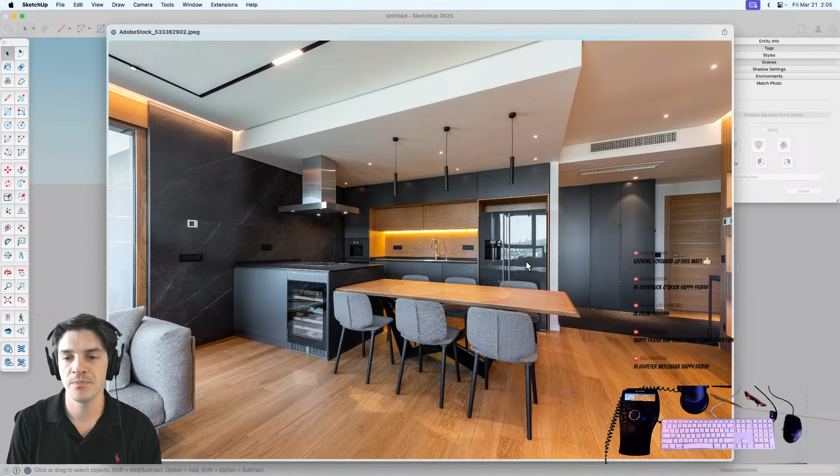But then to counteract the barrel distortion, they took it into some kind of photo editing app and made all the straight lines look straight. But those type of post editing techniques are usually not ideal for match photo, so we'll see if we run into any issues with that.

So you're saying it's all a lie? This space is a lie? Probably, that's what it sounds like. Yeah, I wonder what this would actually feel like if you walked into it. But I mean, I think it looks nice with the straight lines. It's just match photo doesn't work in great ways with that.

So anyways, yeah, let's get to going.

I want to select the photo, make sure that all supported image types are selected. When you import stuff, this is very important when you import an image, is whether you want to bring it in as an image, which is a special type of SketchUp group, a texture, which is a material that you can paint onto surfaces, or as a matched photo. This stream is about matched photos, so that's what we're doing for this one.

All right, bring it up. And here we are. There's a lot. This is, the first time I started up match photo, I was like, okay, this is too much, I don't know what's going on. I'm used to SketchUp being just faces and edges, really simple and easy to understand. There's all kinds of stuff, I feel like I'm in 2001 Space Odyssey, something crazy is going on, but it's not that intimidating. I'm here to tell you if you've never used this before.

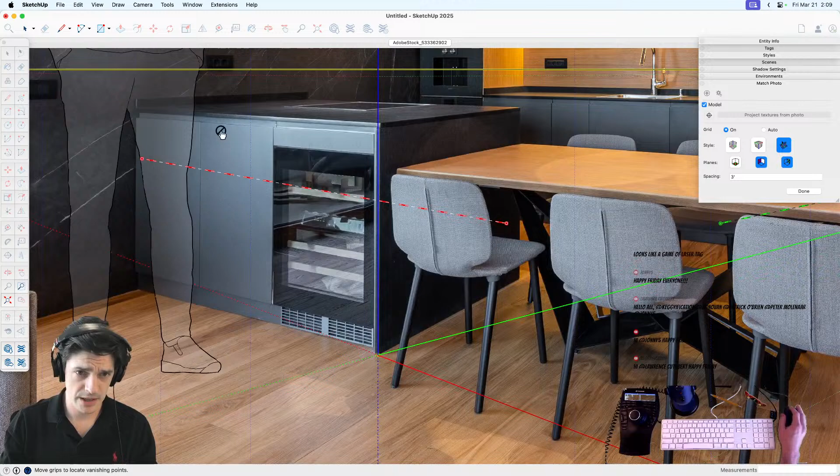The first one that I'll do is the origin. So this is literally the axis origin. When you start up a new model, this is what this is moving around. Typically you'd want to put this at where the ground meets, for an exterior, that main edge that's coming towards you, where the axes converge. In an interior, the corresponding edge to that would be kind of this one right here, where these two big planes of the main walls converge, but I can't really see where the floor is down here. So I guess I could try to guess and put it in, but in this case, I'm just gonna stick it right on this little countertop because this kind of comes out just like a building would.

So I'm just gonna drop this right in this corner. And one thing when you're doing match photos, it's all from the same perspective, right? So you can zoom in and pan around and that doesn't affect anything. But as soon as you orbit, then you lose that. So whenever you make a match photo, it will put you into a scene with the styles, so it's like a special kind of scene that has this match photo and these overlays and stuff. You can zoom in all you want and pan all you want, you just can't orbit or else it'll move you away from that perspective. So one thing to keep in mind when you're using match photos, certainly.

Okay, so I'm going to try to drop this right on that little spot. And yeah, it's not exactly perfect, but I guess the further you zoom in, the further it's like, oh, it's 2 pixels off. I think it'll probably be fine. Yeah, Studio RT Cool said, litmus test is this: if the vertical lines are vertical and the horizontal line isn't dead middle, then it's been corrected.

Yes, that's a good rubric, certainly.

Ricardo asks if it's possible to use the tool to fit an already modeled object to the photo as well. It is, yeah. I'm not going to do that now, but basically you'd orbit to around the same view and angle as the picture, go through this whole process, then scale it, move it around, and put the model into the correct perspective of the picture pretty easily.

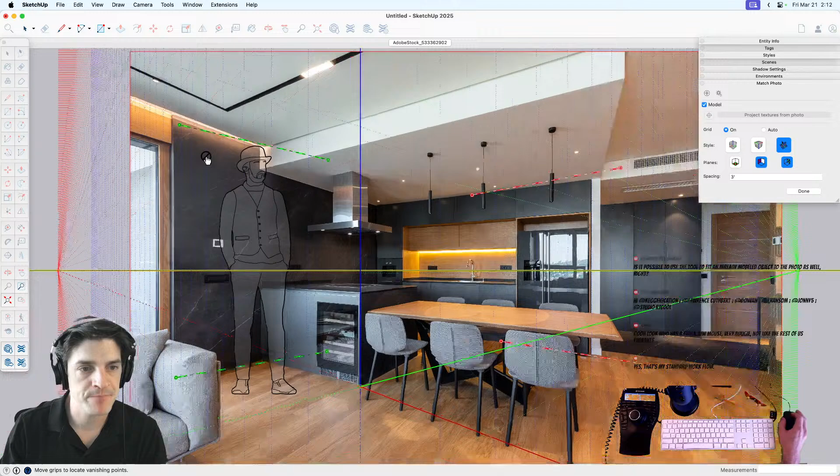Now I have to find lines that are parallel for each axis. One thing I noticed when testing this before is that small adjustments make a big difference. I haven't proven this, but I think the farther apart the parallel lines are, the more leeway you have on how exact you need to be - the difference between them gives you more accuracy. That's my hypothesis, but I haven't taken it into the lab yet.

Peter says choosing the necessary vanishing point is the trick to making a good drawing. Yeah, I could use this one up here, but it's a bit higher, so I'll try using that one instead for the green side - the very top of this marble wall, I suppose, it's what it looks like to me. You can try to put this right on the end like this, but you don't have to, it's really just all about the line. I'll pull it a little bit longer so I can get a better look at whether that's lining up or not. It's pretty close right there.

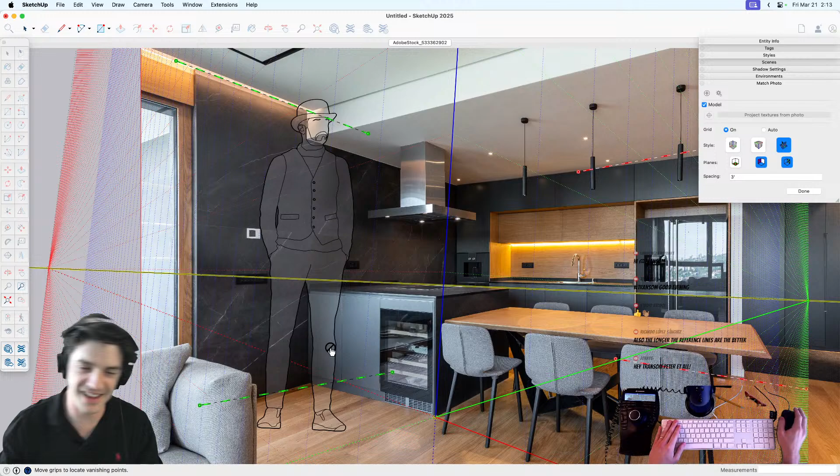Sorry, I have my microphone - I have so many things set up, and my microphone is right center of my screen, but it's blocking the bottom middle. So I have to move my head around, or I guess I could just pan around to the top of the screen. You learn something new every day. Oh yeah, so let's see.

I guess I'll just use the straight up floor, that should be okay I feel like, because it's on the same plane as this - and it doesn't even have to be on the same plane as long as it's on the same vanishing point, right, as long as it's parallel. So I could technically use these floorboards or something to line that up. But green looks pretty good. Let's try to do this upper part.

Studio RT Cool says you can drag the line around and check it with multiple references. With multiple references? What is it - oh, meaning I could go like this. Oh okay, yeah that's cool, good call. Yeah, because it kind of looks like it's lined up over here, but when I do it on this one, it's not. So that is a great tip.

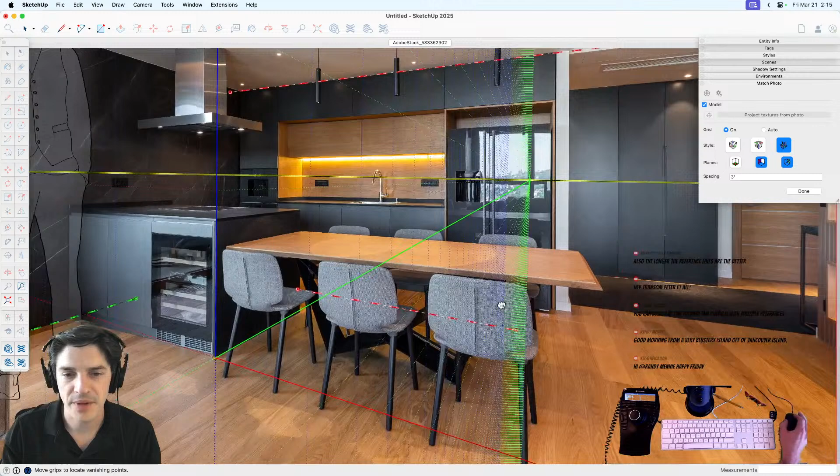Let's see, so I just need again this parallel - this bottom of this wall is not really visible, I mean it kind of is, but well, let's see what's going on here. I got the beach ball - are you still with me? Yeah, okay, yeah, I'm still here.

Okay, that's good. John is asking, can you add extra lines? Not that I know of, although you could do the same thing Studio RT Cool said, where you just drag it around, and if it's at the right perspective, it should match on all of them. I think really all you need is two, and then the relation between them.

Okay, party on. Let's see if this is not responding. Love to see it. All right, well, we get a crash course in doing it again real quick.

Yeah, one thing that's also cool about match photos - you can do multiple different photos in one model. If you have them at different angles of an exterior building, for instance, you can take them from every 45 degrees.

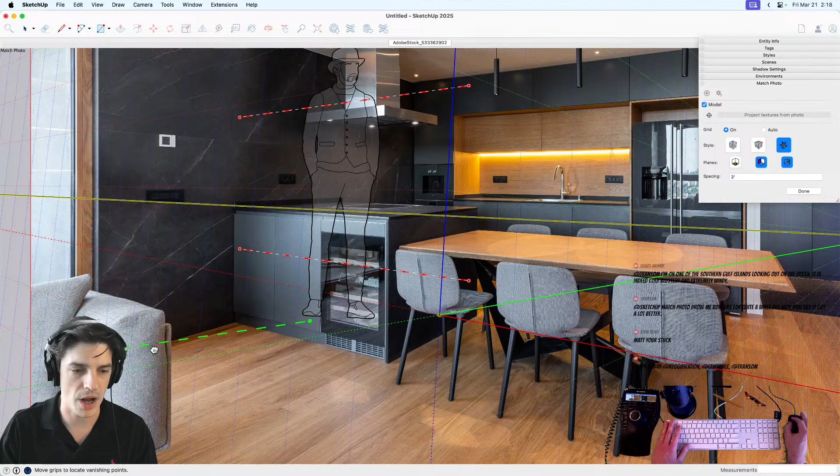Transom says Match Photo drove him bonkers for quite a while, but with practice it got a lot better. There's one thing in particular that I didn't understand about how it worked, and I was always running into problems with it. I'll try to show that in a second. Maybe it's the same thing, Transom, that you ran into.

So as I was saying before I was so rudely interrupted by SketchUp quitting unexpectedly, this edge is kind of hard to see. So I think I'm just going to use this straight up table edge, because it's parallel to the other red line and right in front of me and easy to see.

So I'll just try to go right down the center of this little line here. And then, oh, I forgot to move this guy, didn't I? Yep, get the origin right on the corner here.

One thing also is the scale. You can see TomTom is in here and he's kind of at the right scale. If you drag on any one of the axes, it'll scale, so you can see him get bigger and smaller.

By default, I think the spacing is set to 3 feet maybe, so there's this grid in between here, right? In between all the axes, it's just a grid, and that can be used to roughly set scale for this.

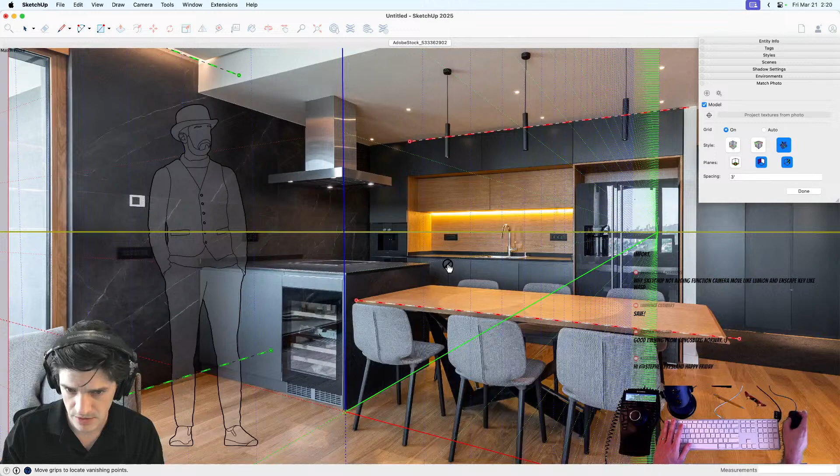And then yeah, again, I guess we could try to check these and make sure that they're all parallel, which, hey, I say looks pretty good. So I'm gonna say done.

And now we have our scene set up with our scale appropriate in there and the perspective is correct. And I'm going to save my progress.

Yeah, probably need to do that quite a few times. Just to be safe. Be careful. Yeah.

I had been having the same kind of troubles that Aaron had last week with internet connectivity problems. So that's the bad news, I guess. The good news is that I think I sorted it out. So software stuff aside, hopefully we don't lose any connectivity here, but I hate to say it has been happening to me this week. So we shall see, but hey, knock on wood that it doesn't.

Okay, so we are in here. This is the key thing that I always got wrong with Match Photo. I would do the perspective lines and everything and be like, all right, great, let's start sketching this out. You know what I mean? Or maybe I'd go from here to here, and then I'd push this back, and then I'd be like, all right, get that good. And then I'd orbit to check it out.

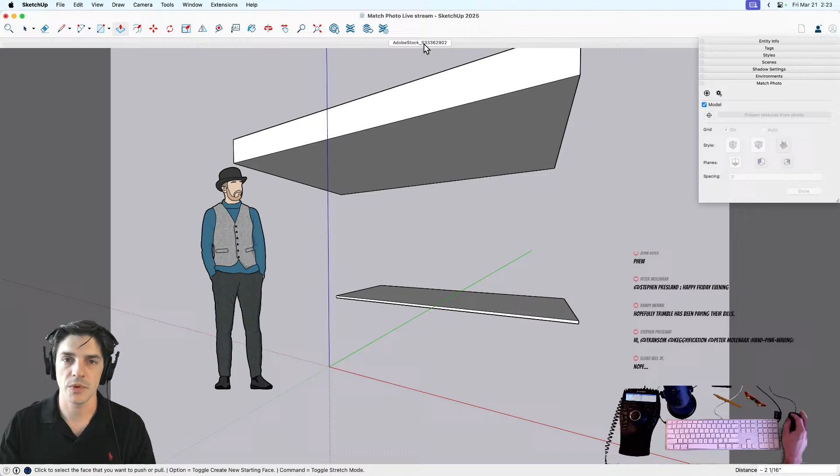But the thing is, you want to start modeling from the origin, because the origin is where all the perspective comes from. So as long as you start from the origin and then reference or inference from geometry based off the original stuff that you drew from the origin, then everything will be properly aligned and in the right spot.

So that's one thing that I tried to use with Match Photo, and then I was like, okay, this is a nightmare, I can't get anything right. I'm always spending 10 minutes tracing it and then orbiting around and looking at it and everything's wrong.

Elijah says you should line your corner to a corner.

Line your corner to a corner. The origin, you mean? You didn't specify. Perhaps. Well, let's see if I start drawing. And again, oops. Oh boy.

Here's one more thing when you're doing match photo: it's set up in a scene, right? So when you click back, just to save the extra 2 seconds every time I go into it, I'm going to turn off scene transitions under animation in model info. That way, if I go back to it, I snap right back, and I don't have to wait 2 seconds for the camera to animate.

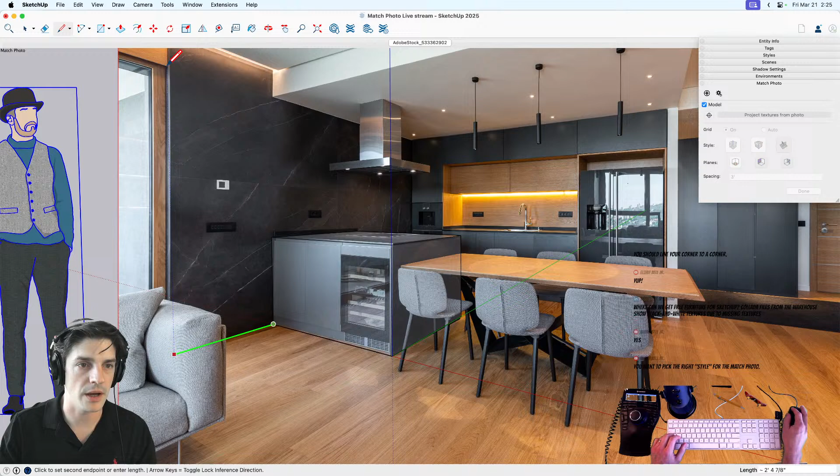First, start drawing in the green, and the nice thing about this is I can inference to the picture itself. So there's more distortion at the corners. You can see it doesn't exactly line up straight, but I'm just going to try to bring it to, I don't know, halfway up, splitting the difference. And then to here. And then I can come, let's see.

Got a question from LinkedIn. Where can we get free furniture for SketchUp? A lot of files from the warehouse show black and white textures due to missing textures. Oh, interesting. Like models that have V-Ray textures applied, or textures from another rendering software. Is that what they're saying?

Not sure. Maybe. Because any materials that were in the model when it was uploaded should still be there, and not be black and white. I've never seen a black and white type thing before, but I have seen missing textures in a model once it's uploaded to warehouse, like my own, that Aaron actually did a tutorial on how to fix, because when I applied them in the model I didn't do it quite right, so they didn't work. Oh, like for AR viewing. Yeah, for AR viewing. So you go into AR, and there's just a bunch of blank spaces in the model where texture should be. Yeah, maybe that's what they're talking about. I would check out our YouTube channel for that video in particular to see how you can make your model look as it should when you're doing AR viewing off 3D Warehouse.

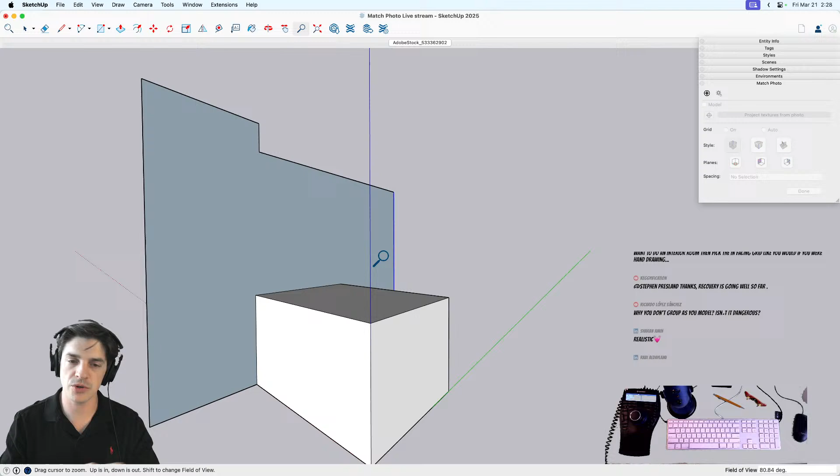So let me just orbit out here real quick and see how things are looking. One thing you'll notice is that there's a lot of distortion going on because the SketchUp camera matched as close as it could the perspective of the photograph. When I hit Z, you can see my field of view is 80 degrees, which usually you wouldn't model in because there's so much distortion. But like I said, for real estate and stuff, they'll shoot that to make spaces seem bigger and more fancy than they actually are.

So Ricardo says, why do you group your model? Isn't it dangerous? Why don't you group as you model? Isn't it dangerous? Yes.

So this is kind of a specific workflow because you're tracing over stuff, right? I could group this as a wall right now, group this as a wall, but because I'm just tracing, it's helpful to have stuff that I can interact with. Like if I wanted to draw a rectangle over this and push this back, I'd have to go into the group and do that - not that annoying, but just one extra step versus at this point just tracing everything out. That's what I'm doing, getting the rough shapes in there, and then I'll go back in and group things in a way that they don't interact or do anything we don't want later. But now I'm just trying to roughly put in and block in the basic shapes and geometry of the space.

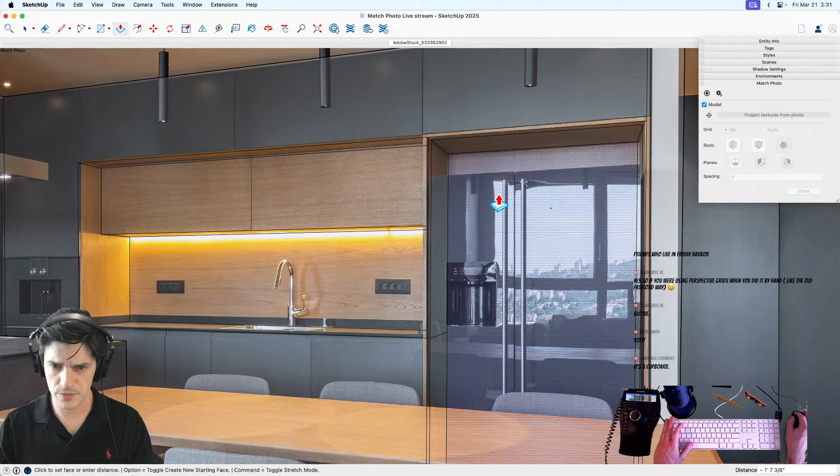How deep is a fridge? More than 1'7", isn't it? Typically, yeah. Maybe it's a European fridge. So maybe the fridge is typically 30 to 36 inches deep, depending on the style of the fridge. Cool.

Lauren says it's a cupboard. All right, could just be the camera distortion that's making it look weird to my eye.

But Ricardo says, I guess you're not grouping to surprise us later with all the projection of textures on the image - wink, wink. Yeah, that's one thing that's cool about Match Photo, is the projection of textures too.

So I can show you what that looks like. I guess I can just show you right now. So when you have - let's see if it works on groups, I don't think it works on group geometry, but we can try. I have my scene here, my photo match, and my geometry is on here. And then I'm going to right click and say project photo. And then what this does is asks well, one of these, so I'll just say no for now and show you what this does.

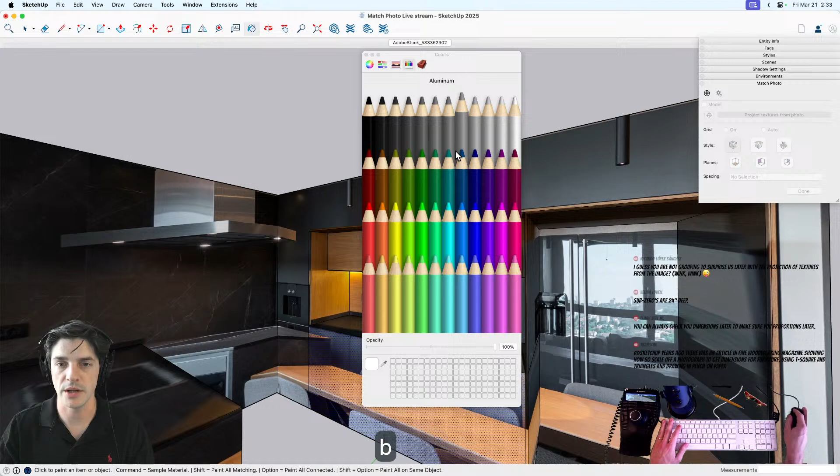So now from my particular angle, this geometry appears as though everything's in the right place, right? But since it's projected, it doesn't exactly do what you want it to do. But this is actually pretty nice. I can look at it at a couple different angles, and the back wall looks pretty right. I could come in here and change this to be a different material or whatever it is, if that's what I was going for.

There's always going to be a little bit of distortion because you're taking the photo at an angle to do the match photo. So maybe a quick and dirty way - or if you're doing context buildings, this is an easy way to get them looking like the real building looks without modeling in all the detail.

But for this particular case, actually I should say, oh boy, it's already 34 minutes in. Time flies when we're having fun, right? I guess so, right.

What I was going to say is my goal for this stream is to model out the majority of the shapes in here and then kind of apply materials to try to replicate the look of this interior space. And I feel like there's always that one point when I do live streams where I'm like, okay, I need to actually buckle down and try hard now, or get going.

Elijah says you can always check your dimensions later to make sure your proportions are right. Transom said years ago there was an article in Fine Woodworking magazine showing how to scale up a photograph to get dimensions for furniture using T-square and triangles and drawing in pencil and paper. Interesting, now we're just using technology. The old-fashioned way sounds more fun than...

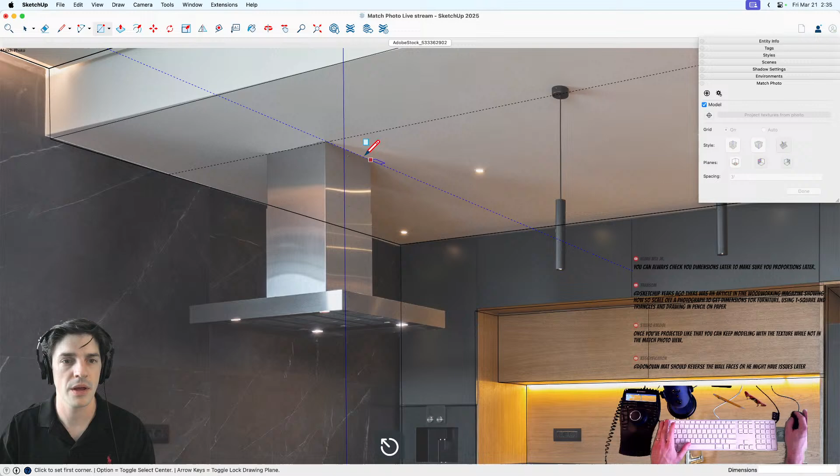Keggy says Matt should reverse the wall faces or he might have issues later. Yeah, that's a good point. I will do that as soon as I'm done roughing in this stuff.

Studio RT Cool says once you've projected like that, you can keep modeling the textures while not in match photo view. Keep modeling with textures.

Oh, meaning like... I don't know, all this is beyond my area of expertise. Not that I have an area of expertise, but this is definitely beyond any area of expertise that I have. Yeah, me too. Let's see.

Is this maybe not, might not be a square? If I'm just tracing over this in 3D.

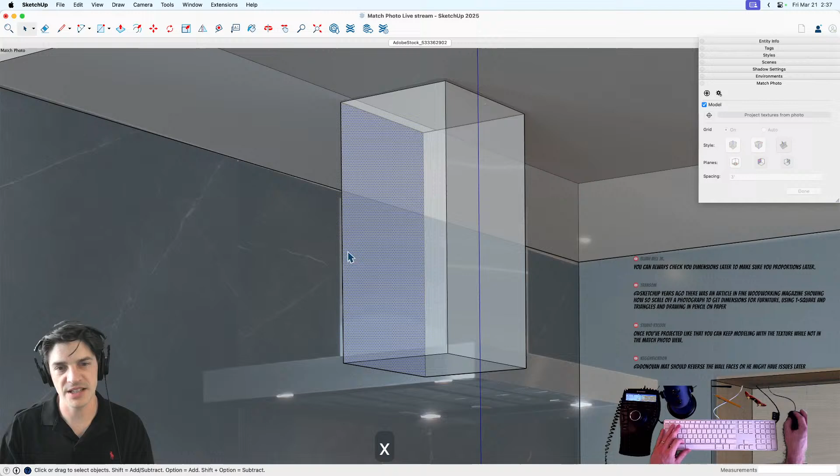One thing that's nice about match photo is, okay, when I'm looking at this from this angle, this looks like it comes out maybe a little bit further, or steps out or something. But I can't grab that face, even in X-ray I can't really get to that face. But if I orbit out, go over to that face and start the action, whether it's push, pull, or move, and then go back to my scene without orbiting, I can move that face into the exact right spot as long as I don't orbit again.

Oh boy, to get that lined up a little bit nicer.

But what are you gonna do? Okay, this one's really... we're here to find out, right? Sorry, what'd you say? I said that's what we're here to find out. Yeah, oh yeah.

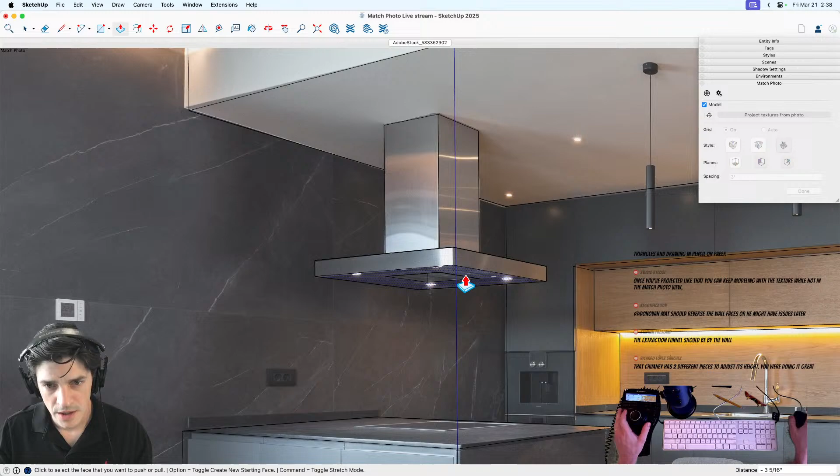Okay, push. Nope. Go back to our scene. Okay, so that looks like it's on there. Oh boy, pretty good. Let's maybe do this table section. Or, I didn't do the floor yet either. I guess for the floor, I can just go like this.

Elijah says it looks like the top of the hood is tapered down a bit. And Ricardo says the chimney has two different pieces to adjust its height.

You were doing it great. Yeah, maybe I should. Oops. I'm trying to use this 3D mouse, but it's one of those muscle memory things where I'm not really used to it yet. Okay.

So if I move that vertically and then switch back to this, it was like hands off the 3D mouse when you're in match photo view. And then these maybe just go in like 0.5 or something.

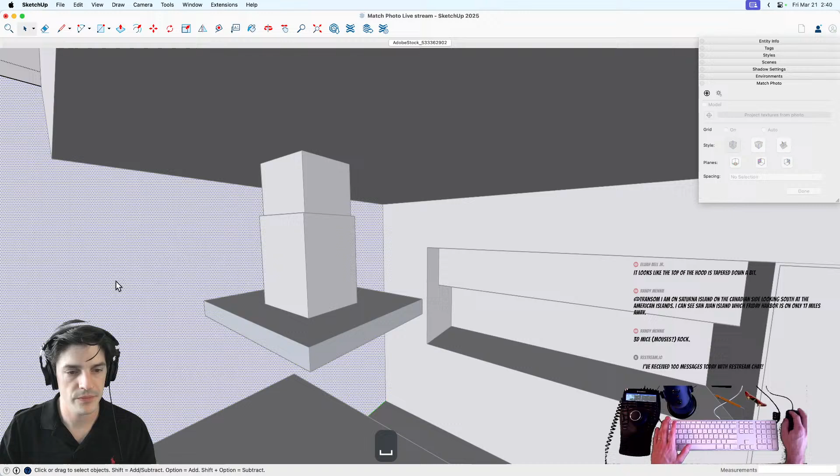All right, okay, let's see about these reversed faces. Reverse, reverse. Ooh. Okay.

And he says 3D mouse rocks. Yay, yeah, I've definitely felt like I've been rocking with it so far. Feels like I'm flying. That's what I told Aaron the first couple of times I used it, I was like, it feels like I'm flying. Because when you're so used to only being able to move in or orbit separately, to do them at the same time just kind of frees you up so much. It's a good feeling.

Okay, so that's kind of the roof part, and then this to here.

Yeah, as it gets more close to the side, you lose the... maybe that's just further back.

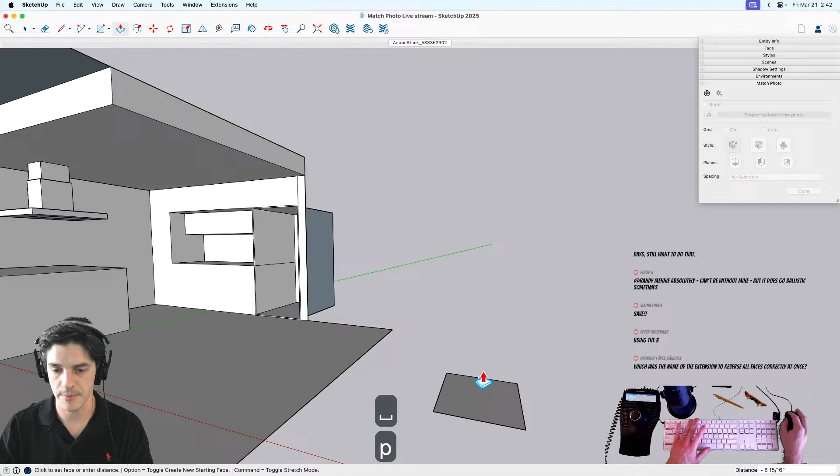Ricardo asks what is the name of the extension to reverse all faces correctly at once, if there is one. I don't know it, but Orient Faces does that without an extension in SketchUp. So if I have, let me just get something over here, and if I have these reversed... so don't mind the weird camera angle, but you can see there's all these kind of reversed faces here. As long as they're all connected, you can right click on one of the faces that's oriented the right way, and then say orient faces, and that will make all the faces switch to match the orientation of that one. But if there is an extension that does that in a different way, I'd be interested to hear about it.

Studio RT Cool says native tools can orient faces, but it can be confusing.

Okay, so I do have another picture of the same space. I got this picture to show us the detail on this table, which we might not even get to, but there's this kind of weird triangle thing going on underneath. I was trying to see how far back it went. Probably it just goes... I'm just going to say it goes the same distance back as this on that side.

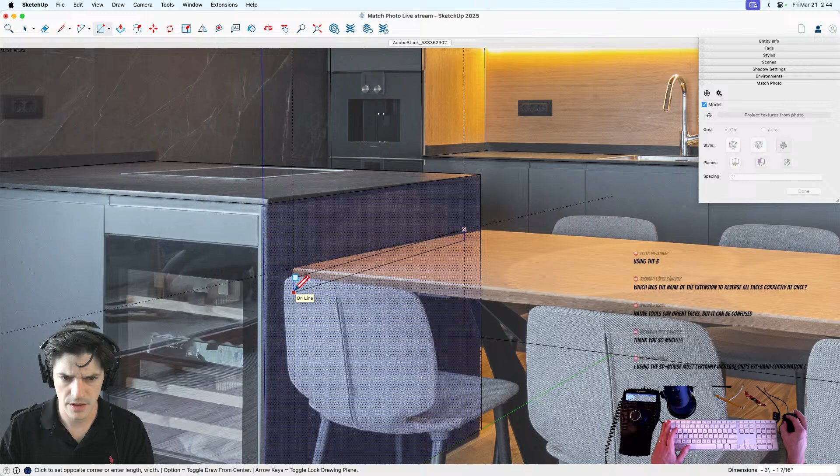Make sure you know which direction you're pulling guides from. Green, 4 inches, rectangle, down this way. And then we'll do a proverbial push-pull.

Don't orbit. Maybe that's the bad thing about the 3D mouse, that you can orbit so easily and freely with it. Randy, or Peter says using a 3D mouse must certainly increase one's eye-hand coordination. Yeah, I feel like it does. It's definitely a different way of moving and thinking in 3D. Not that I'm a master or anything, but I feel a lot more free, even after a couple days of using it, you kind of get used to it a little bit.

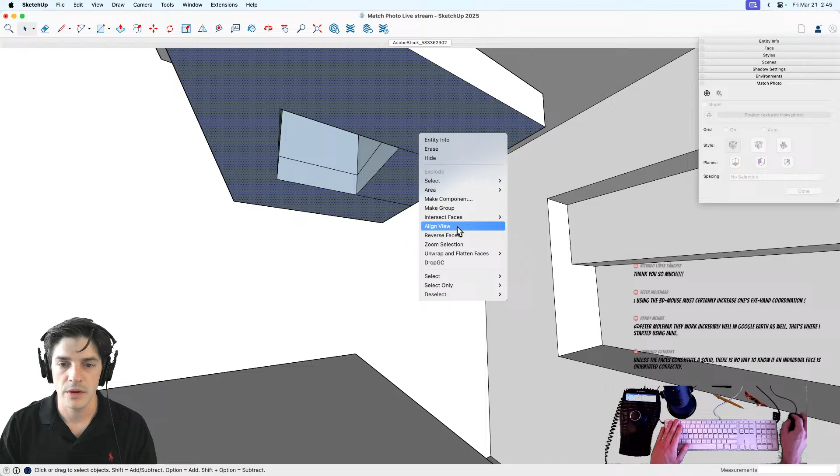And this is weird. Reverse these faces. I'm just going to close this up and say don't worry about what's going on under there. Pay no attention to the man behind the camera.

So I don't even know if I'm going to do this kind of mudroom hallway with this door and stuff, or maybe I should just focus on the kitchen itself. What do you think, chat? What are your thoughts, Donovan? Should I do this back hallway too? Yeah, depth, gotta go for depth, right? Depth in your model is good.

We don't know how far it looks. It looks like, I can't tell if this ends here or if it goes behind. I'm trying to orbit back there. If this hallway extends, or if it just ends here and these are there, either way it goes backwards a little bit. So if there was this here and this actually moves a little bit further, let's see.

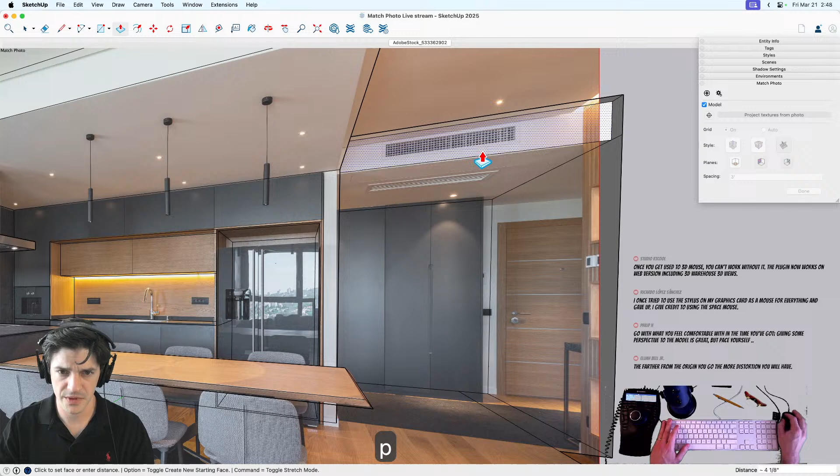Ricardo says I once tried to use a stylus on my graphics card as a mouse for everything and gave up. Give credit to using the space mouse. Philip responded, go with what you feel comfortable with in the time that you've got. Giving some perspective to the model is great, but pace yourself. I think that's in reference to the question you asked about whether or not you should do that. Elijah said the farther from the origin you go, the more distortion you're going to have, so keep that in mind.

Yeah, that is true. Towards the edge, stuff gets pretty funky in this photo. You can tell, I only felt like I pushed this a little bit, but it's all the way over there. Anyways, okay, this we can say.

Just doing this door frame, and then here we go. We got a door. All right, let's do these lights now.

So I think I'm going to do a little bit of a mixture of tracing the picture and also using guides and dimensions to make sure that they're actually accurately spaced. Oh, you said the G word. Hey, I've already stealthily used a couple guides already so far, but yeah, I'm not averse.

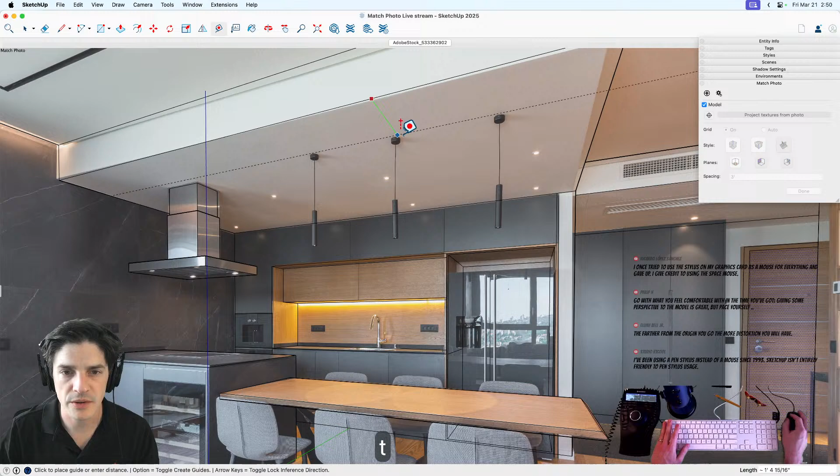Let's see, do we think they line up maybe with the middle of this thing? Or maybe they're not lined up with that at all. Maybe they're lined up with the middle of this table? What does it look like to you? I don't know, hard to tell. If we try to pull one to the middle, what does that look like? I would assume that they would be middle to the table.

Oh, look at that, you're right. Whoa, is that just luck? Yeah, that's almost exact, isn't it? Oh wait, I was looking at it at a weird angle, but yeah, never mind, it's pretty close. And it looks like maybe it might be lined up with the front of that. So maybe that's the idea, is it lined up with the side of that guy?

Okay, so maybe I will just do that. 3 feet, gotta be. Wait, what? Move. Oh, okay, I understand now. 2 feet, gotta be. All right, move this 2 feet this way.

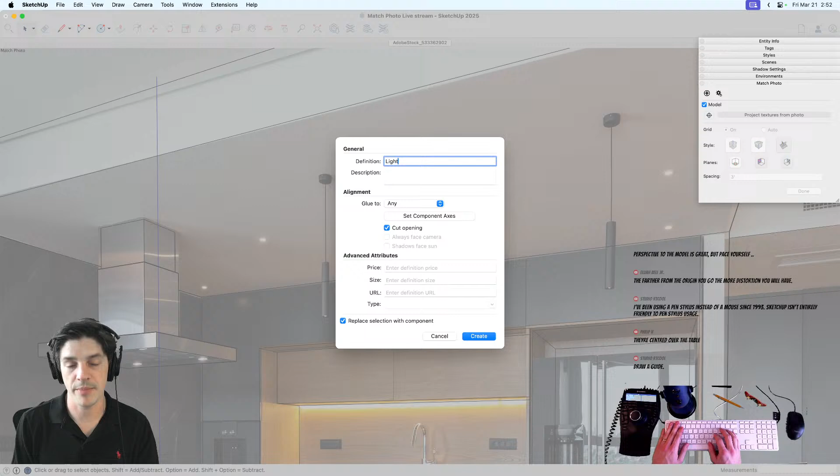Delete this. And yeah, it's not going to line up exactly, but I'm okay with that. Maybe I should make that into a component before I do that. That's using the old noodle. Make component, light, there's got to be a pendant light. Is that a light that comes straight down? Pendant light. One.

And then we'll move this guy 2 feet, and 2 feet. Yeah, maybe I should rough some other stuff in first before I'm already working on it. Let's do it. Okay, yeah, let's keep going.

Estimating, and then this is rounded a little bit. So what I'm going to do here is offset a little bit and then move this vertically just to kind of emulate that little round there. Offset again to get towards the middle, and I'm just going to pull this down. Looks like it kind of has a little curve to it, at least on the middle one, maybe that's due to the camera correction, but I don't know. Pull it down to here. Offset again, and down to here.

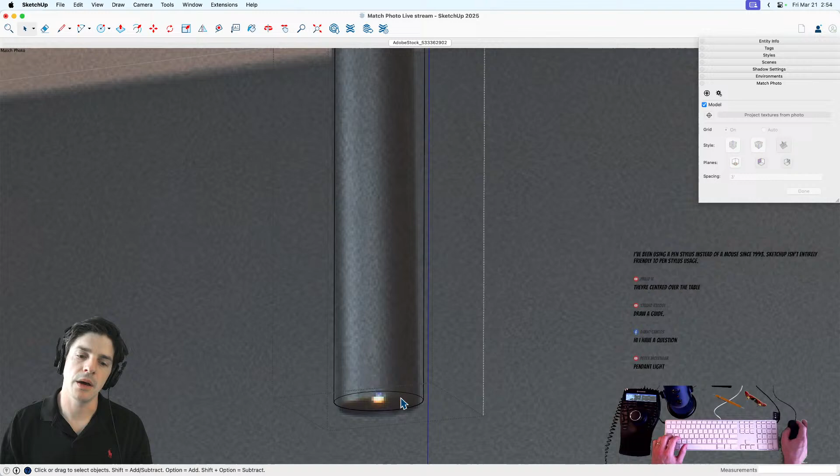Yeah, I can't tell. It looks like maybe it's offset, and then this is kind of pushed up like.

You know what, this camera view is kind of annoying me. So what I'm going to do is make a new scene and a new style as well, because that's where the match photo stuff is at in this one. I'll mess with that in a second to show you how it works. But for this scene, I'm going to change my field of view to something more normal, maybe 40 millimeters.

Not add, oops. Delete this and rename it normal perspective. Persp. Okay, and it did not save that. So, delete.

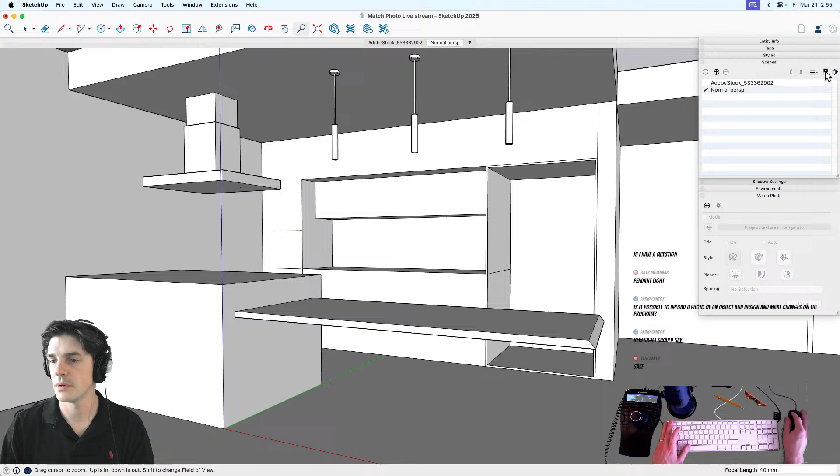Okay, cool. So when I'm back in this other scene, in styles with that photo in here, I can adjust how opaque the foreground and background are. So if I wanted to see more or less of what's going on back there, this has worked out okay. So I'll leave that as is.

Let's see what else we have. The bottom of the table, certainly. Obviously the materials—I'll probably go to 3D Warehouse for the sink stuff and the refrigerator too. There are those little locker kind of things over here, so I'll kind of work those out. Those go all the way up to the ceiling.

And then it's divided into thirds. Not lining up exactly, but what are you going to do? Like I said, unfortunately you're bound by the focal view of the image unless you have multiple images. Maybe someday we'll do modeling from a point cloud—go in, 3D scan a space, and then model from that. That's the real future.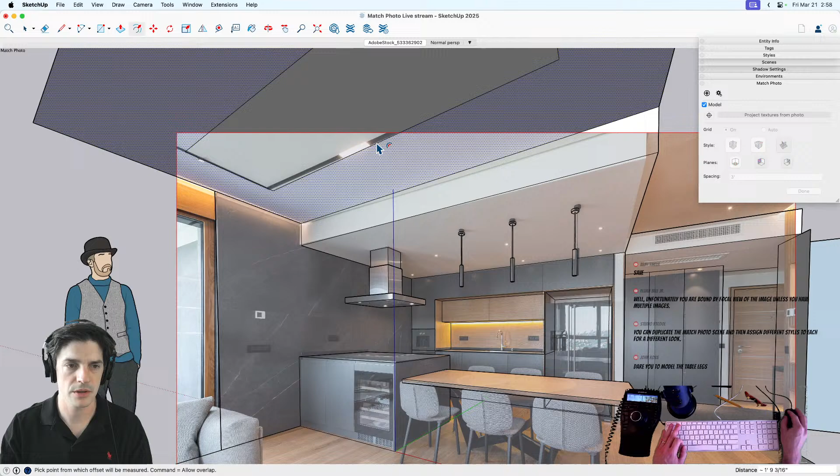Studio RT Cool says you can duplicate the match photo scene and then assign different styles to each different look. Meaning like have one of these with this off and then one with it on, but still be from the same angle. I'm guessing, yes. That's a good point.

Wait, oh, okay, add. And then this one will say foreground off, update, and then update. Oops.

Scene, transup says save, smart. Purge unused—I don't think I have any unused stuff. Oh, I guess I did have unused styles. Well, there you go, always good to purge unused.

Okay, and then I don't know what I'm doing, so I just delete the scene. And yes, okay.

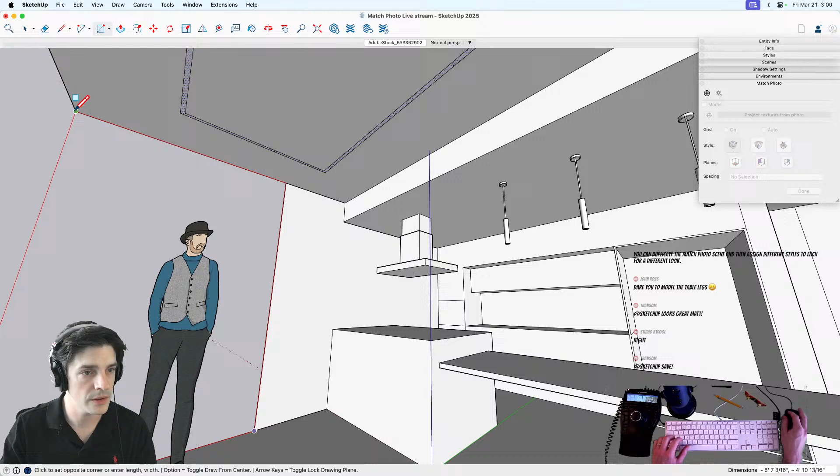Yeah, okay, so I was doing this here, offset to here, offset again. Okay, this window, I'll just draw this rectangle out here. And it looks like it goes back a little bit. And then there's the window. This one comes down further.

It's so cool how we can do this. Yeah, it does feel like cheating, you know? Like you shouldn't be able to trace like this, but okay.

Okay, yeah, let's see. There's these cabinets up here.

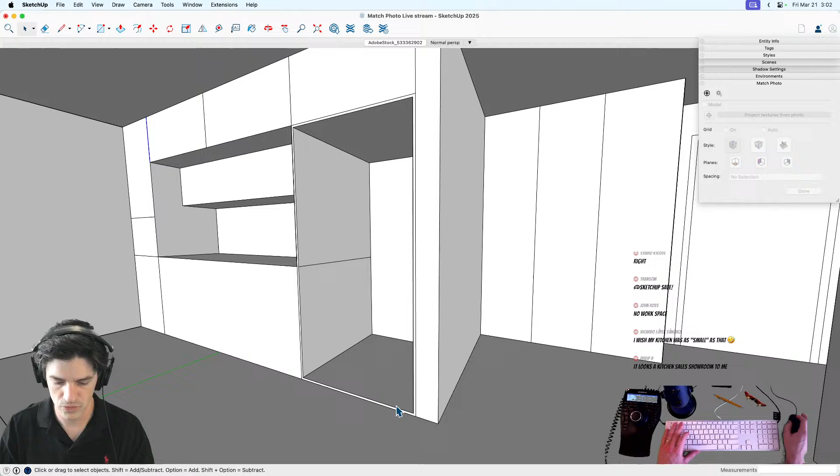By the way, this kitchen seems like kind of an interesting space to me—does anybody else feel like that? It looks like high quality materials, contemporary and stuff, but it's also small. Is it just because it's a European kitchen? Is it a kind of showroom type thing? Is this just a really nice apartment? That would be my guess, a showroom—there's such small prep space. It doesn't even seem like there's enough room to actually use the things, you know? Yeah, so maybe it's kind of just a space to show off what you could do, like IKEA showrooms. You go in there and think, wow, this is cool, but you wouldn't want to actually cook or live in here. John says workspace—yeah, could be like a co-working space with a kitchen. It definitely has that vibe of places our friend Aaron would go to, a communal space where you can rent an office but there's a kitchen, so it has that new contemporary look. At the same time, not being entirely practical if you were to live there.

I'm just kind of mocking in some. Ty says this kitchen has about double the space as my kitchen. I hear you.

It does have a really nice hood. I've always wanted one of those. You know, our house just has the little fan on the microwave, and it doesn't do anything.

Yeah, it's one of those like elevator close-door button, or a walk sign. It makes you feel like you're doing something when you push it a lot, but nothing's happening. Still, your house is going to get really smoky - or at least mine does.

Okay. What is going on over here? So this counter kind of just goes straight down and across.

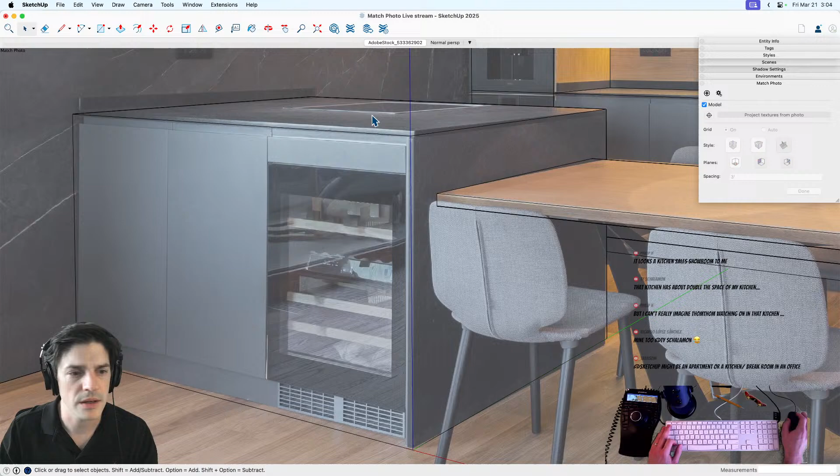I don't know, there's a lot of different things I could spend time on. Maybe I'll try to do this underneath-the-table thing real quick, and then spend the last 45 or so doing materials and grouping stuff, getting stuff off the warehouse.

Okay, so there's this triangle. If I could zoom in more. Okay, not that way - come back.

This triangle kind of, I don't know, cat-eye looking motif here, moves up in a couple spots. It looks like the whole thing is rotationally symmetrical, so I only have to do a quarter of it. And it just kind of angles down weirdly.

This is the kind of spatial understanding of stuff that I do not have whatsoever, and that Aaron is very good at.

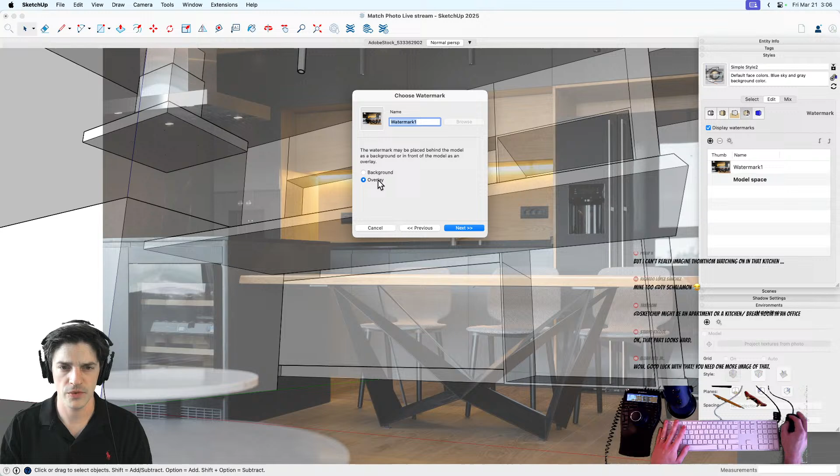So let's see, I'm going to add that photo in as a watermark, so I have just something to look at. It's going to be on overlay - it's very unique table legs.

It's probably way too big of a photo to bring in as a watermark, but what are you going to do? Like 15 megabytes, too large.

Okay, just temporarily I'm going to group all this stuff so it doesn't interact with what I'm doing down here. And I'm going to make a rectangle of this whole thing. Cut this into quarters.

Lars was saying, 'Good evening everyone, nice to see a new face.' Aaron was getting a bit boring.

Elijah says, 'Create points that are close to each touching surface, and then connect them with planes, maybe.' Okay, yeah, I can definitely try that.

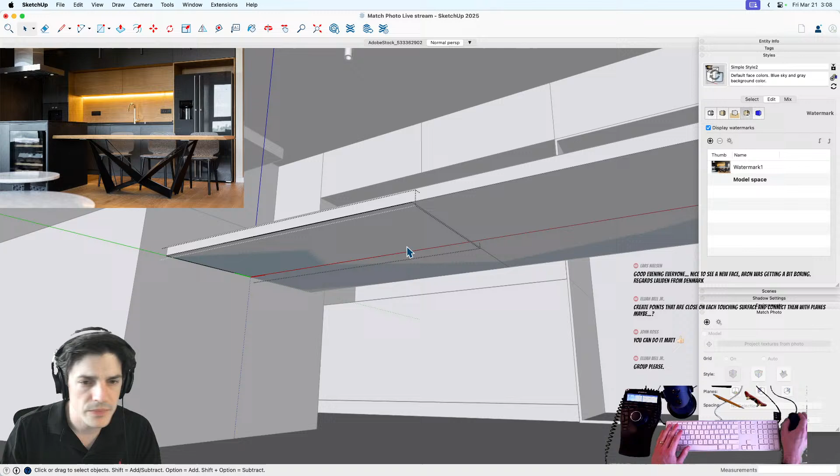Table legs quarter. Okay, and then we want to flip this, make a copy, flip these, make a copy. And then let's see - yeah, let's throw in some kind of planes here real quick so we know what we're doing.

Elijah says, 'Group, please.' Similar components. So kind of comes down from here, and then maybe this is actually a little bit further.

Up like this, and back. And then it's rotated.

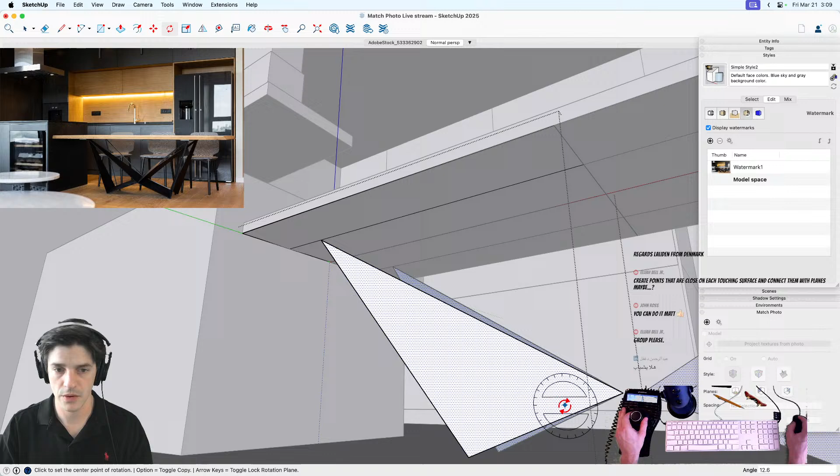But oh, now that I look at this, it's kind of flat, right? Well, I don't know, I like this being close enough, and then I can spend the rest of my time doing other stuff.

All right, in watermark I'm just going to go ahead and delete that one. Save so I can - I guess I don't have anything unused. Good.

Yes, yes, yes, yes, yes. Let's explode this. Let's start grouping stuff.

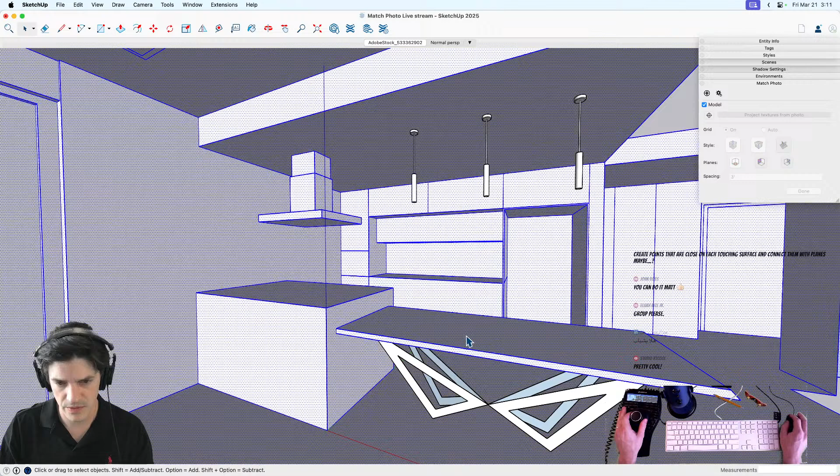These are already components. This is not - so these are components, and let's see, how am I going to only select this piece?

So I'm using the keyboard shortcuts you can see on there, just so I can try to just get this only, and then make sure I didn't select anything else, and fly around. I'm losing control of her.

Elijah just says that is not a cheap table. You are very right, yeah.

Select all instances and then make this a group. Okay, so now our table's a group.

This, without this piece - so I'm just trying to get the little peninsula here. Great.

And our hood as a group.

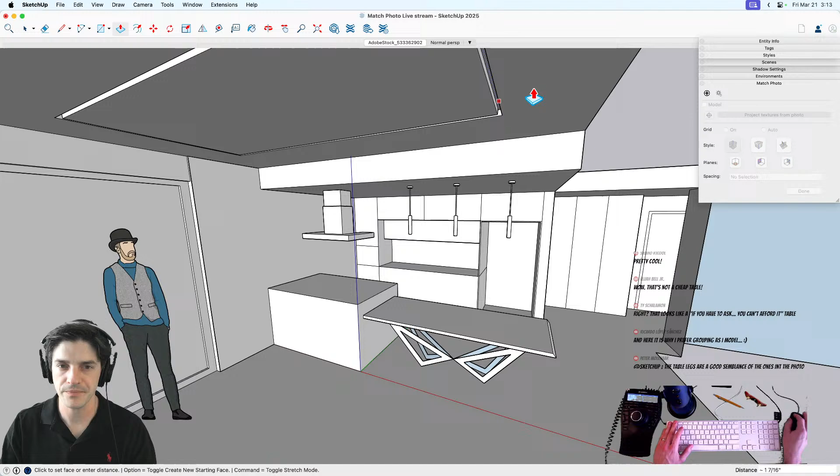And let's see if I want anything separate. All this other stuff could all be together. I'm going to push this up to make it a little more like it's that inset, whatever you want to call it.

That lighting, recessed lighting. Oh, maybe I'll make these little guys a separate group.

I guess they're attached to the wall, aren't they? So they are just part of the wall. That's fine. Okay.

Just so this stuff doesn't stick together, I'm going to make all this other stuff a group too. Is this the best model organization? Absolutely not. But I can't remember who mentioned earlier that you don't really want loose geometry. Thank you for saying that. So now we do not have any loose geometry, everything is accounted for, I believe.

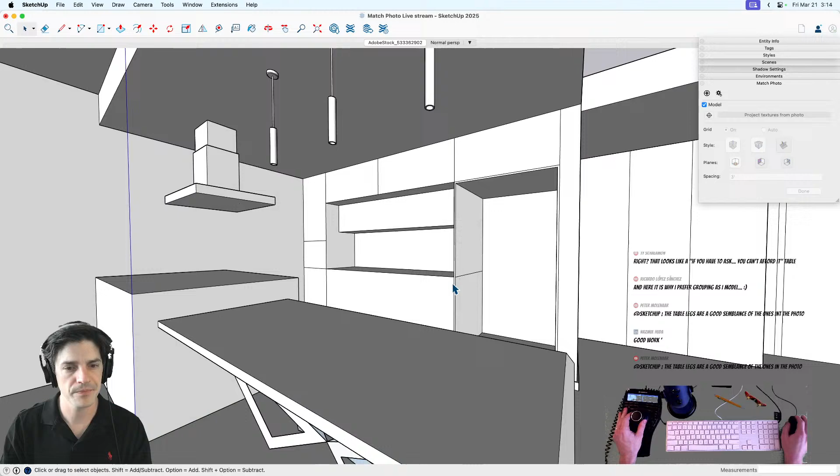Okay, let us... What do you think, folks? Should we do materials first, or should I populate this with stuff from 3D Warehouse? Like, should I get the refrigerator in, and the sink and the cooktop, or should I just start adding materials to try to line them up with the picture? What do you think?

In the meantime, I'll add some. Peter says the table legs are a good semblance of the ones in the photo. Carter says great job. I wouldn't make build plans off them, or sure, it's not called build plans, but shop drawings. I wouldn't make plans. That was okay, build plans. Yeah, plans.

These chairs I'll get on Warehouse too. Let's see, this is kind of split into thirds.

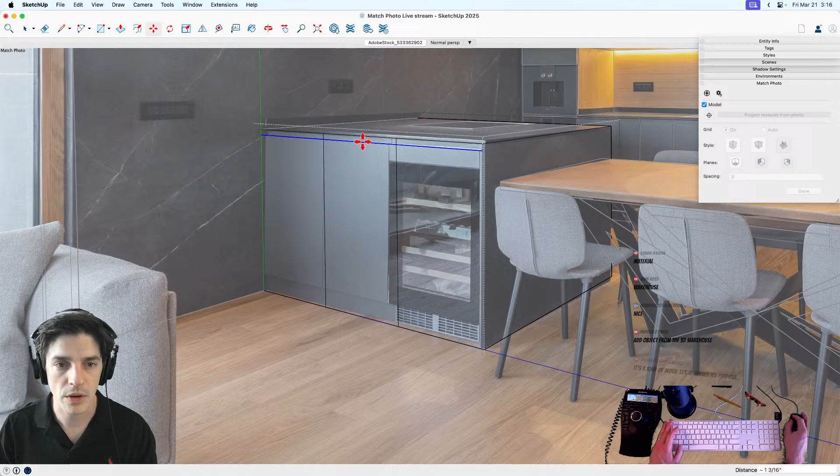Any word from the chat on next steps, or should I just kind of make a call here? So the chat says, see, we've got 2 votes for warehouse. Actually, 3 votes for warehouse, another for warehouse. Warehouse definitely is the winning vote. Okay, cool, we can do that then.

Okay, so let us try to... let's see, what's the best way? I want to try to get this chair. I'm going to do the chairs first. Up over here.

Keggy says, keep rolling Matt, you're doing great. Yay! Thanks, Keggy.

Transit says, if you get things from the warehouse, you can put them on tags so they won't get in the way later. Smart. Tags, always a good model organization technique.

Okay, so this is like a dining chair. Dining, disney, dining chair. Fabric dining chair? I don't know. I'm sure there's like a style. This is contemporary dining chair.

Wow, Elijah says the legs without the top is $1,500. Ooh, it's got a link. Wow, Patrick says use the image to search the warehouse. Oh, very smart. Yeah, okay, let me. That's a great idea. Gosh, I'm so thankful to have you guys here.

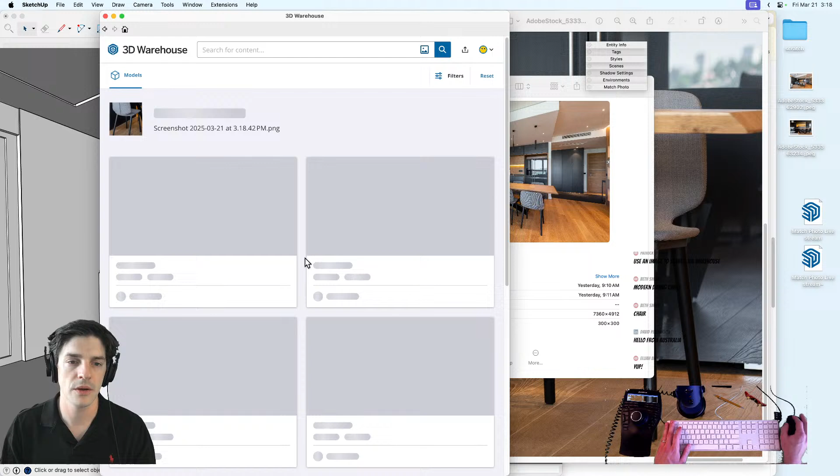Okay, let's see. Definitely got the gray. I mean, it doesn't have to be exactly the right one, but something like this looks pretty close. Close, pretty close. I mean, we can always change the material later too. It doesn't have any arms, you know?

Maybe I'll give it a shot with this one and see what comes out. Studio RT Fool says, I haven't tried this yet.

Couple people on LinkedIn chiming in to say good work. Hey, thank you. Yeah, I think this... oh, 44 megabytes. Okay, maybe not.

Let's see what's going on in this file. Yeah, I wish there was more. What's going on here? Where am I going? This is not what we want.

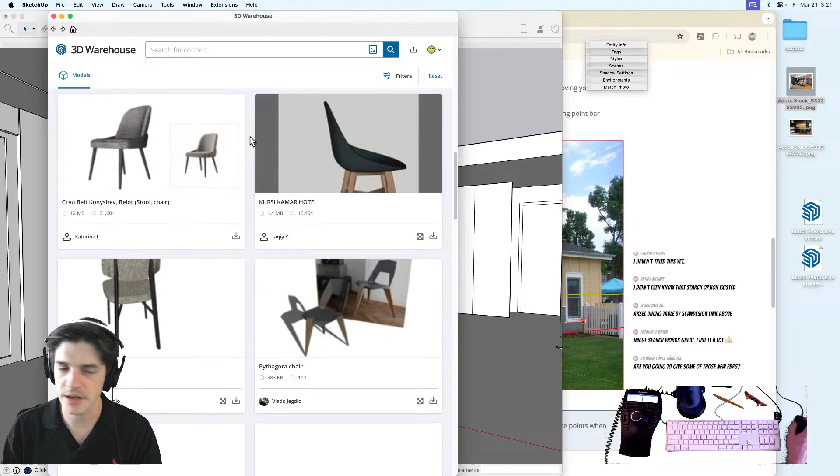I'm getting hung up on this. I shouldn't. Okay. Where did we go? Oh boy, I'm all over the place.

Okay, I'm going to do one more with this guy, and just pick one from here. That's not huge. Let's see. Okay. 3 megabytes, this one's fine. Okay.

I'm taking a walk on the wild side and just bringing this straight into the model without reviewing it or anything. Let's see if any weird tags or anything came in. Nope, that's good. One thing I will change is the...

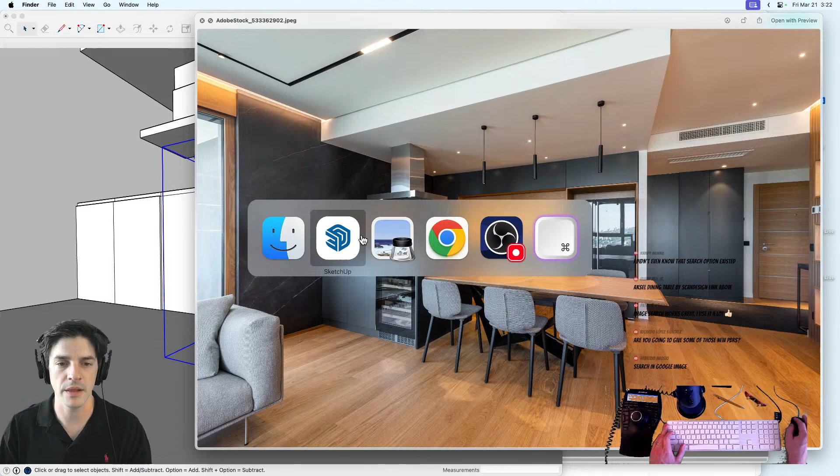Material on the legs. So this looks like almost like painted black wood or something, or maybe it's just plastic. Could be, it could be either. But let's see, these new materials. Try with just black plastic first.

Ricardo says, are you going to give some of those the new PBRs? Yeah, that's the goal, is to have everything in here with updated materials by the end of the stream. We'll see if that works.

So I suppose I should find a fabric that is... this is like jeans, right?

Yeah, it kind of looks right, it's just not the right color. So, again, creative liberties, I'm just gonna pull the blue out of it a little bit. Wish I could make that a little bit bigger. There we go. And then a little bit lighter, I think. Okay, now I just gotta go in here and get all our faces with that.

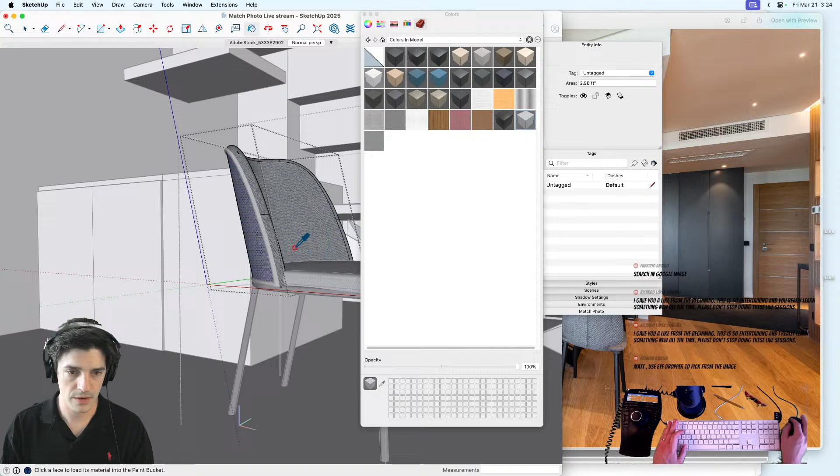All right, that is good enough for that. Okay, I'm going to use the handy new... Patrick says, Matt, use the eyedropper to pick from the image. Oh, to pick the color from the image?

Raymar says, how do you navigate and turn the camera so smooth? Yeah, mine is every time I turn the camera, it brings me to another dimension. Hey, that's happened to me a couple times that I've gone into another dimension here, especially when I'm in the crazy camera view. Whoa. But anyways, I have a 3D space mouse from a company called 3Dconnexion.

This is a Space Mouse Enterprise. Definitely not required to use SketchUp, but definitely helps out with those nice smooth camera moves. Kind of brings your modeling to the next level, gives you more control over moving and selecting a tool at the same time, or navigating, nicer for presentation, or yeah, there's a bunch of cool stuff that the 3D mouse allows you to do. So I am not a master with it, but I definitely find a lot of value out of it nonetheless.

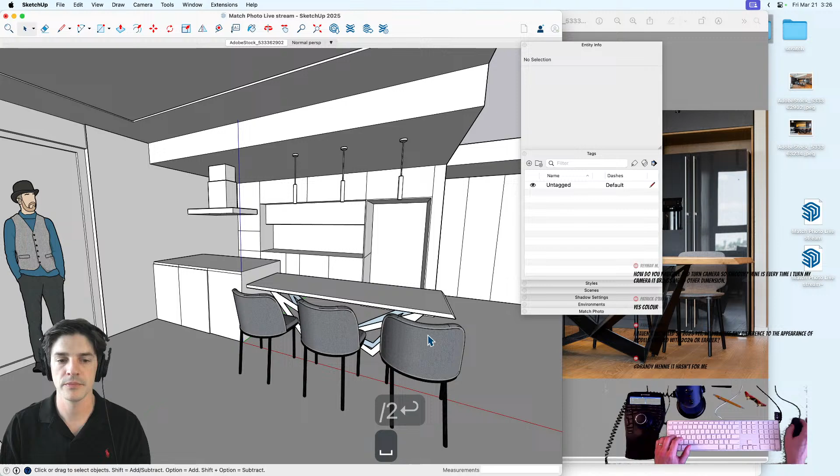There is also smaller, not as fancy, more affordable versions rather than the, I don't know if there's a name for that particular one. Big Bertha? It should be Big Bertha. Yeah, this is the Enterprise. Call it Coach because it has all the whistles, bells and whistles on it. That's good. These need to be scaled a little bit down. But yeah, no, yeah, this is the Enterprise version. There are versions that just have a couple buttons on, and then there's one that's just like the navigation puck on its own. So yeah, a couple different options out there. There's like a wireless one too, if you work on a laptop or like on a plane or something a lot. So yeah, a lot of different options, different convenient options for your modeling needs.

These look like they're a little bit lower, so straight up do that. And then, as somebody was saying earlier, I can select all these, select all instances, and I'll make a new tag called chairs, and then use the tag tool, select all those, and then now when I turn chairs off, bye chairs. So I can be free to work on this table without getting chair legs in my way. Hey, get out of here, I can't see anything.

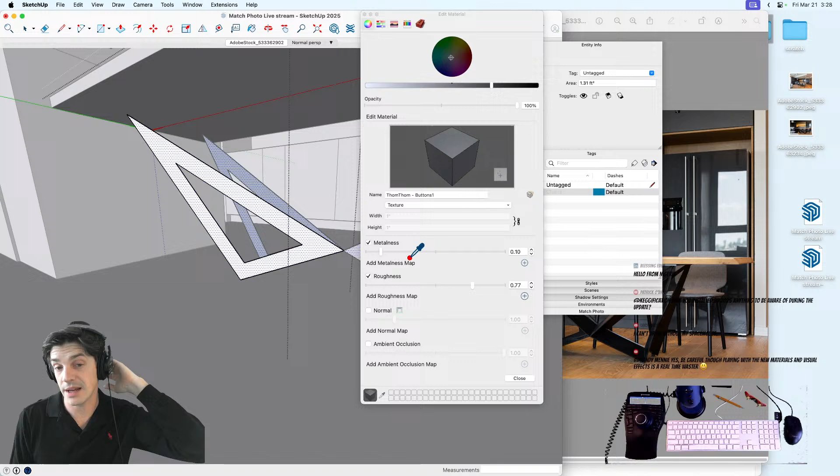No need. Randy says, I haven't installed SketchUp 2025 yet. Will it make any difference to the appearance of the models created in 2024 and earlier? Somewhat, but not like instantly right away. You won't see all the new cool stuff because the materials have to have what's called PBR properties, or physically based rendering properties. Like if I go into edit one, you'll see there's this metalness, roughness, normal, and ambient occlusion, which are different properties that tell the camera how to kind of display certain materials using the environment image-based lighting. So all that is new in 25.

And so if you have older materials, let's see, if you bring in a model with old materials, can you do the automate? So when you bring in a material now, if I brought in a new, I don't have any materials, but this one, for instance, you can add metalness and a roughness to any old material without adding like a specific map to it, and it will reflect certain parts of the environment. But no, you would have to add materials separately.

One nice thing though in 25.2 is that if you have an older material that doesn't have any of these PBR material properties applied, you can use this little AI powered generate textures feature, which I'll just try it on this wood. I don't know where this wood is, maybe it's in one of the chairs, it must be. But so it'll automatically go in, seamlessly tile the texture, number one, and add the relevant maps for each of your properties in there. So that is really cool. And so that's an easy way to go through. You just would go through the materials that are in your model, edit them, do the AI generate textures, and then you'd have something that is a good starting point for getting into the new visualization tools in SketchUp 2025.

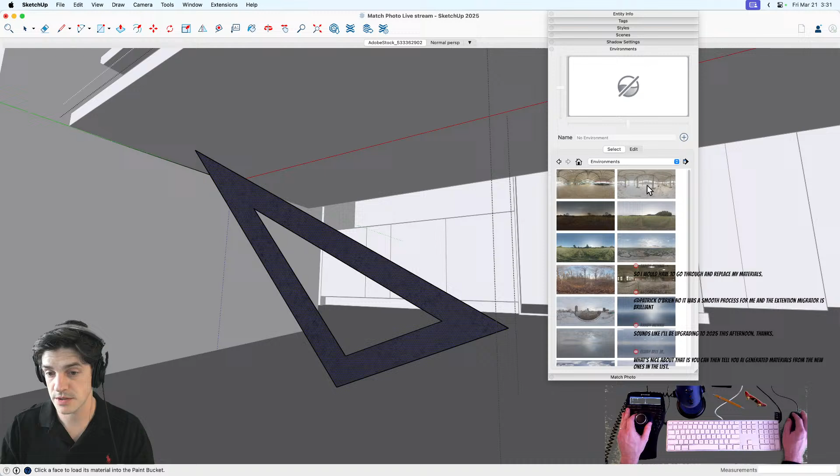Perhaps you've seen this elsewhere, but this kind of material reflections in SketchUp is just something you've never seen before. SketchUp models just look so much different and so cool. So I know the more features we put into SketchUp, the less like SketchUp we seem to look, but it does make the models look amazing.

Okay, this needs a wood texture. Let's take a look at what kind of wood we got in here, and then if we have to go to 3D Warehouse to get a different kind.

I was modeling on the iPad last night and wanted a PBR wood material, and noticed that SketchUp has a collection of PBR wood materials right in the program, which is really helpful. You've got some on here, and these are just ones that are built into the installer, but you can always check out 3D Warehouse for more too.

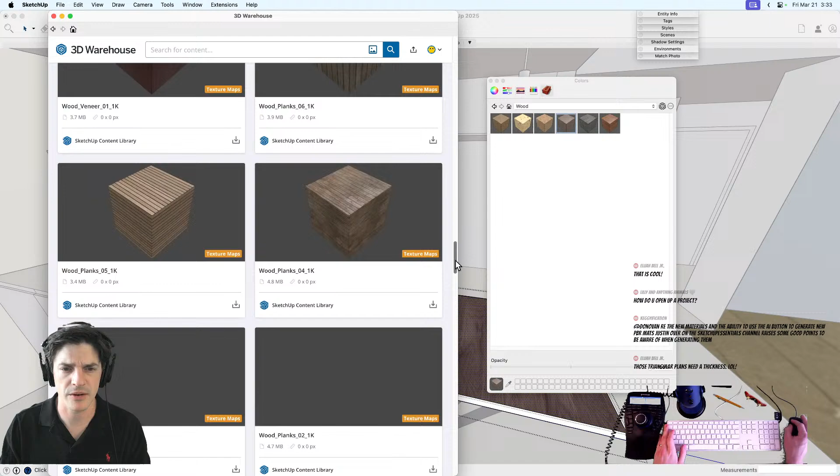So if you go into this wood, there's 70 different kinds of wood in here. Maybe I should just pull one from here. It's like wood planks, kind of looks like that, right? Or no, it's not a veneer. What would a table be made out of? I guess you could use a lot of different types of wood for this. Maybe I'll just try with this one and see.

Position. Kagi says the new materials and the ability to use the AI button to generate new PBR materials, Justin over on SketchUp Essentials channel raised some good points to be aware of when generating them. Those triangular planes.

Sorry. What? I haven't watched that. I haven't watched that video from Justin over at SketchUp Essentials. What are some of the good points that he talked about that we need to be aware of when generating stuff? Have you watched that video, Matt? No, it's specifically about generate textures. Yeah, apparently. No, I haven't seen it.

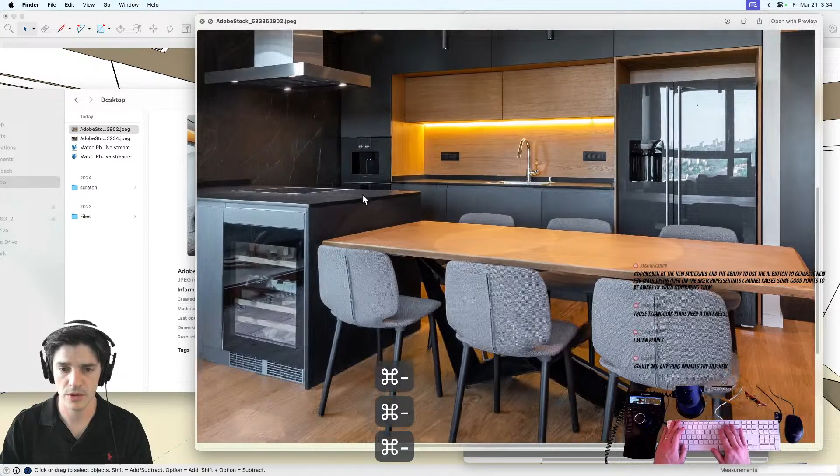Okay, I'm gonna do this little, should open this up in preview too. This wall over here is kind of like has a couple different slabs, is that what you call that? Of marble, so it looks like it's quartered.

So I'll do that, and then yeah. I need to be in the, let's see. Do.

Peggy says one important thing to note is that the original material is discarded, so maybe make a duplicate of it. As you can see, I did that wood material, but it doesn't exist anymore - it completely transforms the material instead of making a copy of it. Good point.

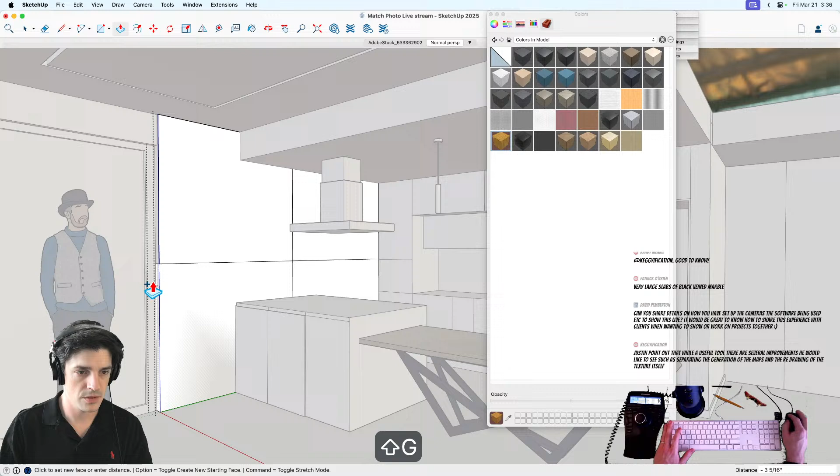He says Justin pointed out that while it's a useful tool, there are several improvements he would like to see, such as separation of the generation maps and the redrawing of the texture itself. The video is well worth the watch.

Yes, that's a good point. I will say, as far as any AI tool, there's always improvements going on, and a lot of good feedback on generate textures. So definitely leaving stuff like that on the forum or elsewhere where the product management team can see it can make a big impact on the direction of the product roadmap going forward.

David from LinkedIn says, can you share details on how you have all the cameras and the software being used, etc., to show this live? It'd be great to know how to share this experience with clients when wanting to show our work on projects together.

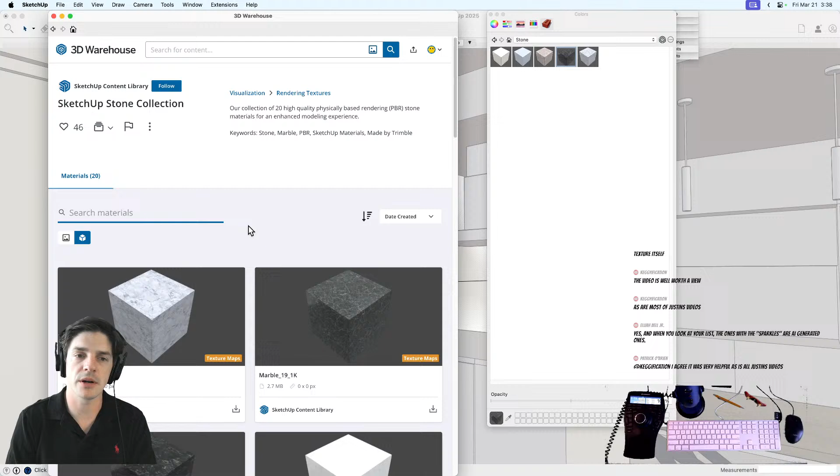Have we ever done a behind the scenes video of how we set our videos up, how we do all this? Not in a long time. Aaron did like a studio tour when we used to do more videos in the actual studio at the office. But yeah, that'd be a good video for sure. We'll make a note of that. Thanks for the suggestion of kind of best practices or good ways for presentation, especially remotely.

So yeah, thanks, this one looks pretty close. Going to stick it on here. Looks like there's some Z-fighting going on, I'll address that in a sec.

And here too. Now, one thing - in the picture these do not tile, right? They're like distinct slabs that have been cut separately. So what I want to do is position this - my mic is literally right in front of that piece, but I'll move it a little bit so that it's not lined up exactly.

Let's see, position, cool. And then there's, let's see. In place. Okay, so we got that kind of wall in there. And what other stuff do we have?

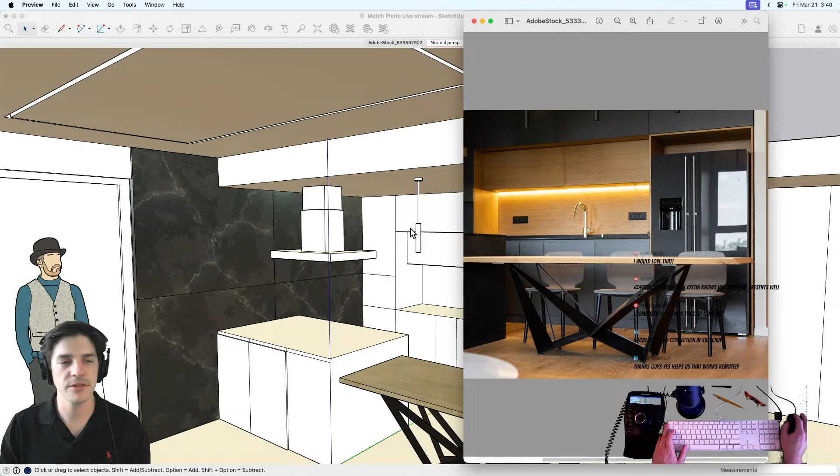Do you guys find putting in materials interesting? I think it's fun from a me perspective, but I don't know from an audience. Like modeling is one thing, putting in materials is kind of a whole nother thing. So what are your guys' thoughts about doing materials on live streams?

Patrick says, I remember the studio tour from so long ago. Feels like that, doesn't it?

Okay, maybe the floor. Back to our wood. And what's a wood that looks like this? Right. I mean, I would guess - are you talking about the tabletop? I'm talking about more of this, like this floor here. Oh, the floor. It looks kind of like a hickory or a cherry.

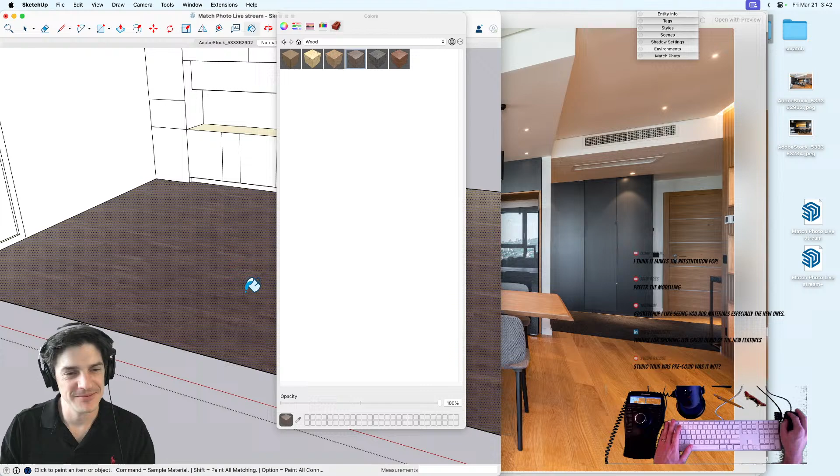Okay, how about wood floor 12? I don't know, might be names closer to wood floor 13. This actually does look about right, at least not the color, but maybe it's the right size.

Hi ho, hi ho. Isn't Snow White out today? The new Snow White video - movie? It did. It's exciting, you gonna go see it? I probably will not, but I haven't been to the theater in a very long time, so I'm not a good barometer of whether or not something's worthy of going. One of the things about having a 1-year-old is you can't really leave him home for 2 hours or take him into a movie, even if it's a kid's movie, for that long.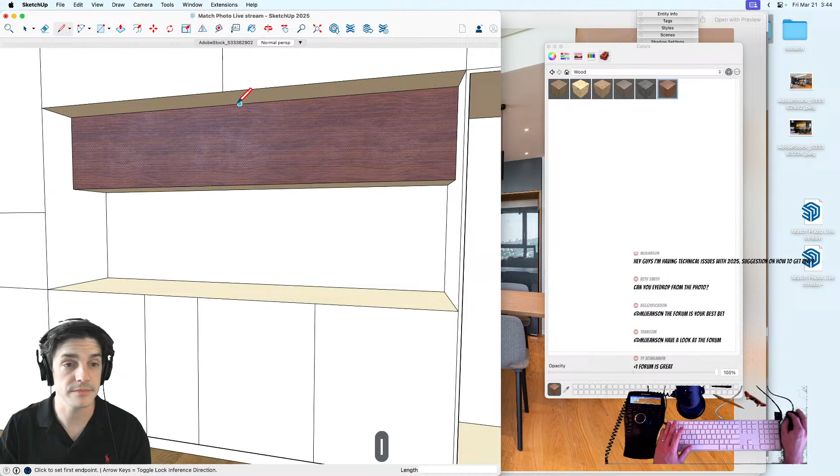But what about you, are you gonna see it? Are you a Disney person? I am a Disney person, I used to work for Disney. I enjoy Disney, I don't have any plans to see it. My girls haven't shown any interest in wanting to watch it, so we're probably not going to. Makes sense. Yeah, that's a good barometer of whether it's worth going to see - if people are interested in seeing it or talking about it.

People are recommending eyedropping the photos - match color to eyedrop using the eyedropper there. Okay, meaning like when I do this and edit this material, and then doing like that. Great, I think I might have dropped a weird piece, but yeah, that is a good call versus trying to futz with it over here.

Maybe something closer to this. Look at this, you guys in the chat are saving my carpal tunnel trying to dial in the exact real color over here, so thank you. Maybe I'll try that for this one too.

Oh, look at that, look at that. Okay, let's see.

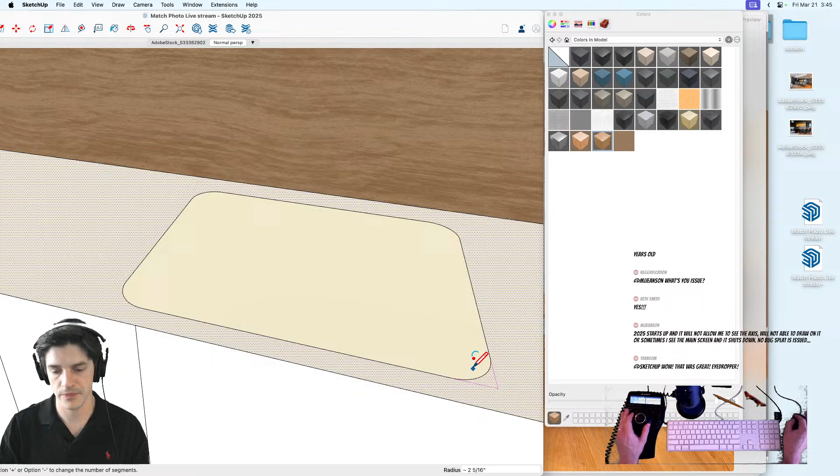MJ Jeanson says 2025 starts up and it will not allow me to see axes. Oh, that's not good. Splat is issued - interesting, I would reach out to technical support. They're usually pretty good and pretty quick.

Yeah, one thing is you might have picked a template that doesn't have the axes showing. Well, it looks like all the ones in here do, but if you have a custom template without the axis - if I start up a new file here, this could be turned off on your template. So if you go just to view axes, that could be a potential way to get it back. I don't know if that's the particular problem you're running into, but something to check for sure.

But yeah, technical support or the forum is another good place to go when you have questions like that.

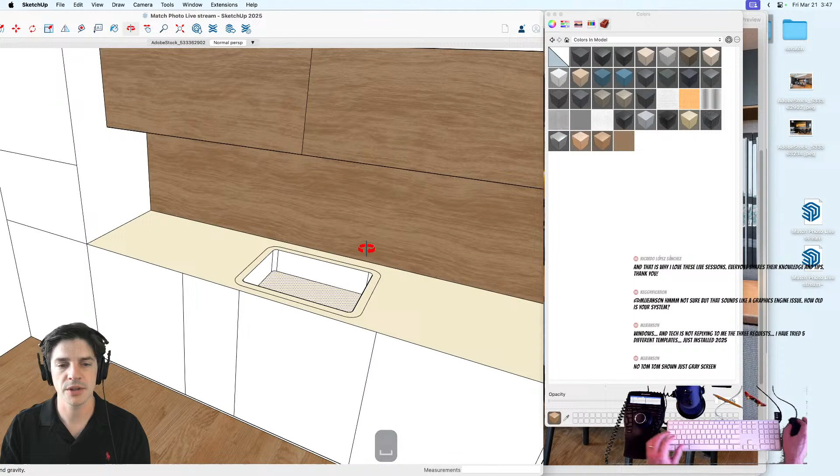That is like kind of a black - look at the material of the countertop there. Is it the same as the wall? No, looks a bit different, doesn't it? I think so, yeah. So let us try to - maybe we can just use the one that's in here, stone.

Yeah, this isn't going to be perfect. It's 3:48 Eastern, so we're going to go kind of quick here. Okay, let's see, just want to get around about this - maybe we can use like a, this should be - all right, there's the model.

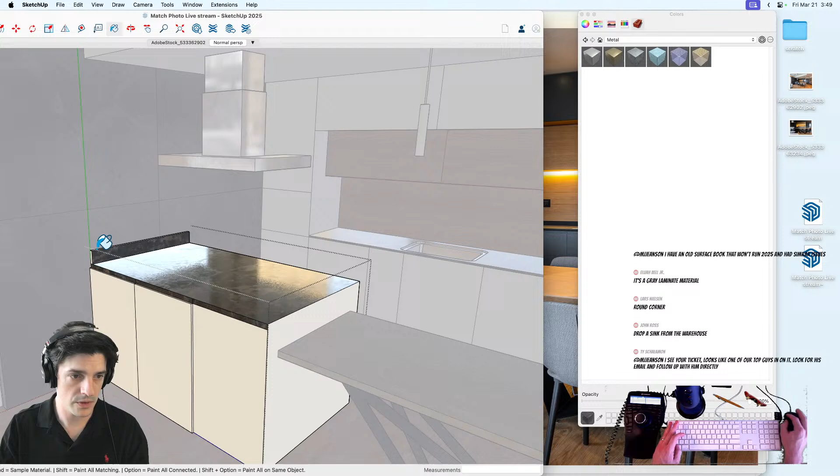Just silently clicking through all these materials here. Don't mind me.

Okay, and then this is kind of like a dark. John says, drop a sink in from the warehouse. Yes, not a bad idea.

What's that? These are kind of a black rough metal. Let's go to the warehouse, to the warehouse we go, off to the warehouse we go, we're going to look for metal. Okay, a lot of perforateds. Let's see, we want something that's kind of not very shiny, but kind of rough. And then we can change the darkness of it. That rough, rough, rough.

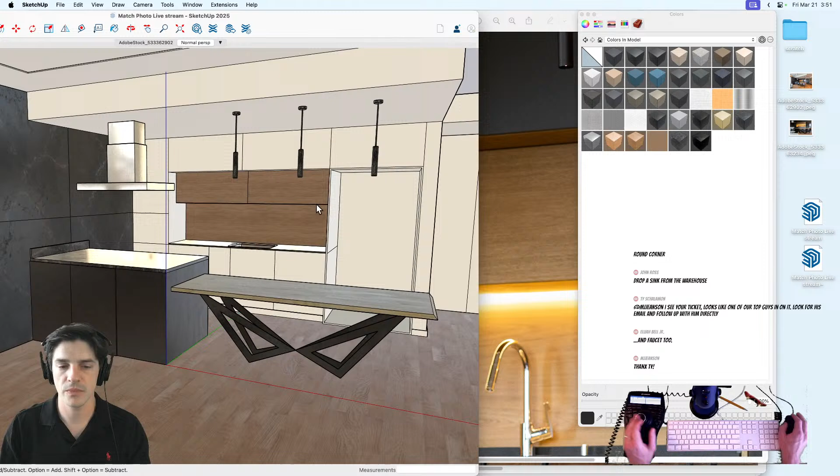Yeah, maybe like this. And a faucet too. Yes, absolutely. And what color? These are the same black.

Yeah, and I need to get a refrigerator as well. Faucet, refrigerator, sink. Sink maybe from this angle is fine. I'll just do the faucet and

Silver faucet. Randy is commiserating about, am I the only one that gets lost scrolling through the myriads of textures? Nope, you're not the only one. There are a lot, there are a lot of textures. There's a lot to get lost in. Yeah, the collections help. But yeah, I agree, there are a lot to pick from.

Let me do that image search again. And back to this. Okie dokie.

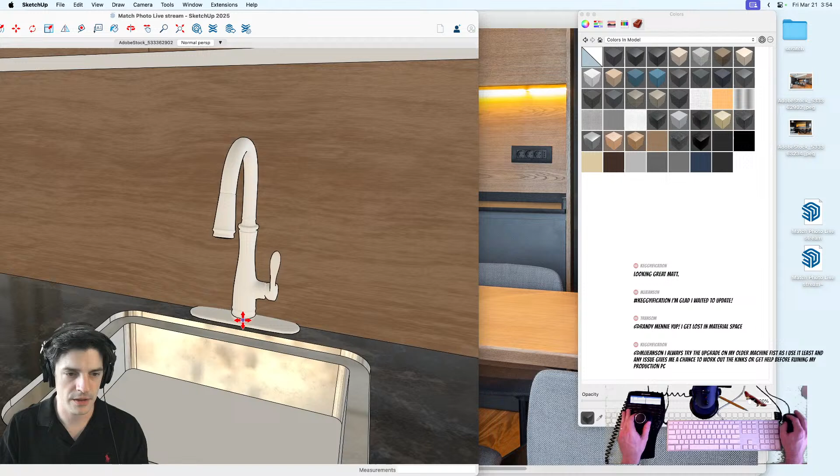Okay, I don't know why I'm taking time. All these will be fine. This works, and put it over here. And does it fit? Absolutely. Shiny.

Randy says they look so cool and realistic, you scroll through them, and even if they're nowhere near what you're looking for. Yep, yeah, yeah, it is fun to look through.

Okay, this, and let's see if we went to, let's get our chairs back in there. We didn't do the fridge yet. Okay, fridge is coming, and big fluffy gray couch maybe too. I don't see that in the picture.

This is over in this corner. Maybe my head's behind it. Oh okay, I was like, wait a minute. But maybe if we just focus on this area. Yeah, we got time, all right.

Yeah, refrigerator. I don't know one that's going to fit in there perfectly, but maybe I should try to find a live component of a refrigerator, let's give it a shot. Refrigerator? Is that how you spell it? About to find out. Refrigerator.

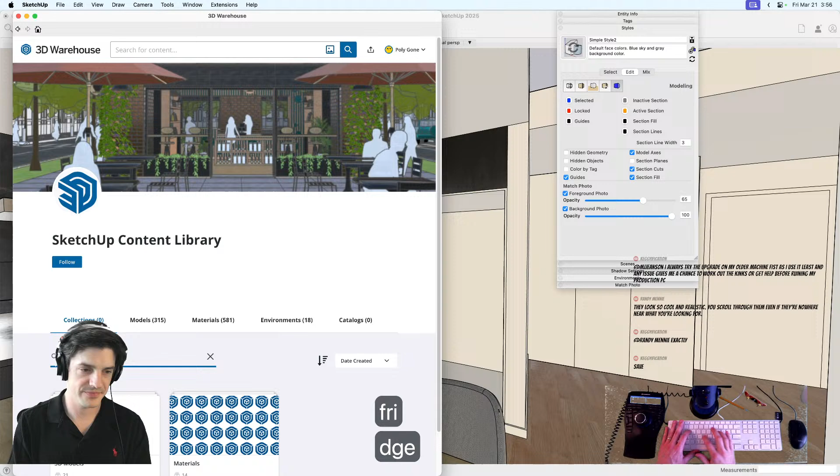Man, there was this milk commercial from the 1990s from when I was a kid. There was the refrigerator, might have been before your time. But ever since I was a kid, anytime I hear the word refrigerator, all I think is refrigerator. Like refrigerator raider, like someone who raids a refrigerator? Okay, yeah, gotcha. And it's this little cartoon of a character jumping through the refrigerator and eating stuff and trying to get to the milk to wash it all down. And I'm pretty sure it was a milk commercial, but the song was Refrigerator.

Okay, let's get this in the right spot. Size looks pretty close. And let's get our little picture up here. Shrink this guy down, I really need two monitors, you know? Not this one, oh yes, this one. So it's really reflective, that's for sure. It does not have a bottom drawer. It does have an ice machine. Save, smart.

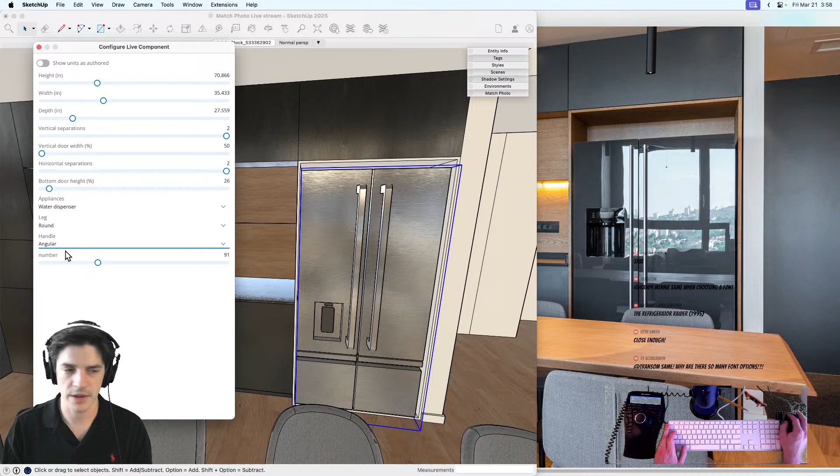Okay. Handle, bring this over. Okay. It's not curved, angular? It's closer. Oh, Refrigerator Raider, 1995. Okay, yep. Horizontal separations? No. Knew somebody else might remember that.

Cool, pretty good. And then let's see, it looks like it's on glass almost, although not that glass. And then sample it. Folks.

Okay, look at that, 2 hours. Okay, styles. Okay, let's just get this color in here real quick. Oh, it's the same as this. Never mind, this. Good. This is a window.

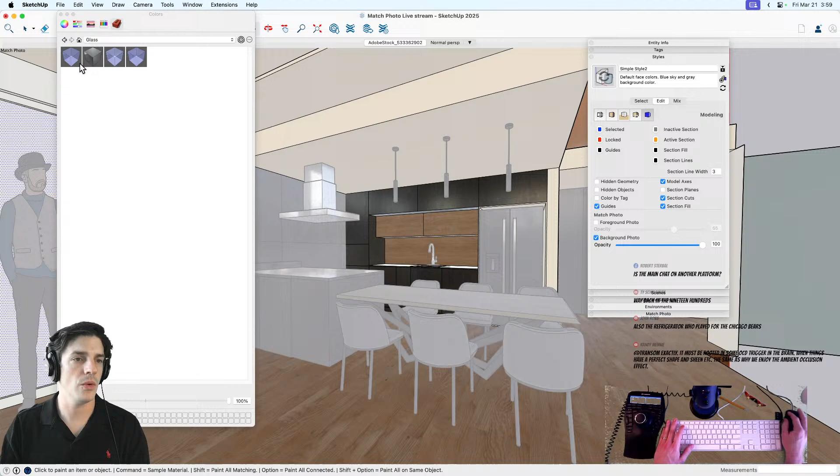Oh yeah John, the refrigerator played for the Chicago Bears, his name, I have his football card. William Perry, I think was his name. The refrigerator that played for the Chicago Bears because he was like 395 pounds. Big dude. Oh, so that's who, yep, it was. John, William Perry, yep, nice.

Rotate 90, enter. Okay. Let's get our styles working here. Ambient occlusion on. Try to rotate our environment to match here.

So, let's see. And maybe shadows a little bit brighter. He's looking good.

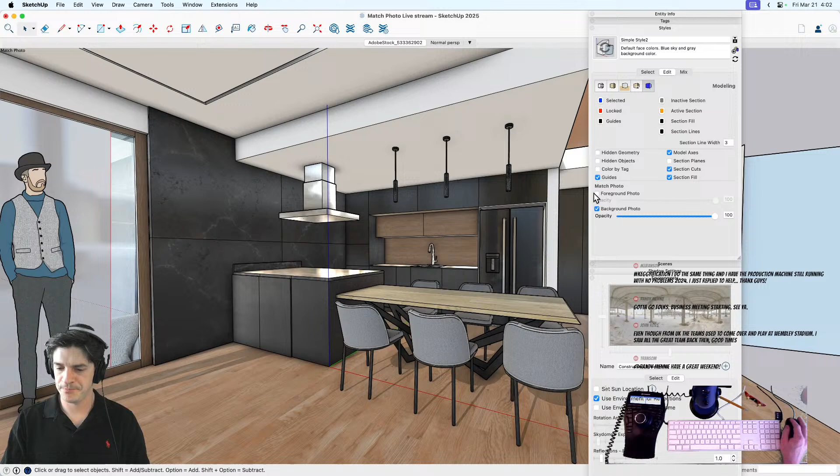I'll kind of walk through how I feel like I've done here, and then we can wrap up. One thing I should mention before I do a little design crit on myself, design review, is that...

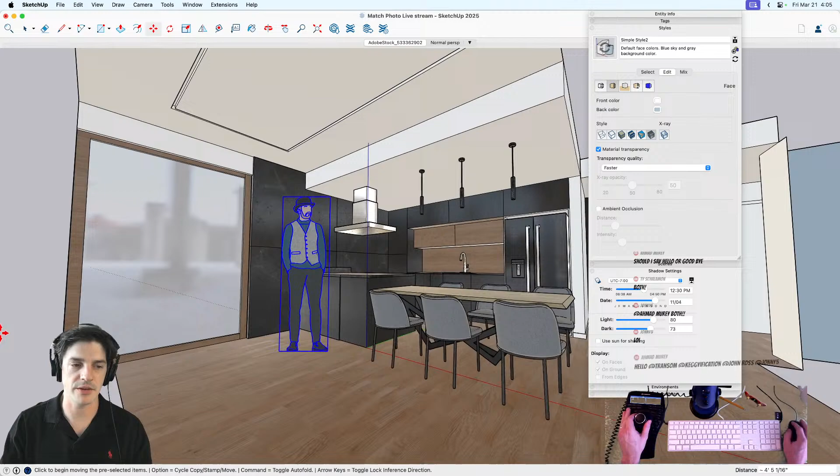But for a quick and easy way to mock up a space when you have an existing photo, especially because a lot of times I think of match photo as just for exteriors. When I suggested the idea of taking an existing photo of an interior and modeling it, I brought it to Donovan and Aaron, and they said, why don't you use match photo for that? I was like, oh, because I was not going to do that. But I think I learned a lot about how to use match photo, and ended up with a pretty cool looking model. So I'm happy with that for sure.

Yeah, let's maybe change the old stylerino here. That is the technical term for it. It should be, if it's not in the documentation. And go over here. So yeah, it was a fun one today.